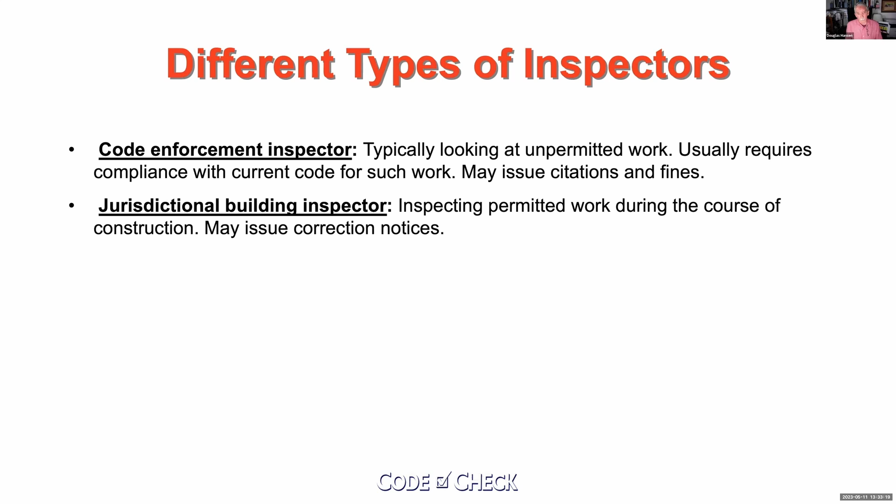Whereas a building inspector is somebody who actually is responding to the fact that there is a building permit and is out there to make their inspections during the course of construction. And then there's a home inspector.

A home inspector has really got a broader net in a way, because you can use a lot of the same data points as a jurisdictional building inspector or a code enforcement inspector, but actually much, much more, because you're there to provide your client with a much wider range of information based on your own experience and training.

So the way construction projects are supposed to work, and once in a while they do work this way, is that somebody decides they want to build something, build a house, say. They apply for a permit, they submit plans, it goes through plan review, they issue the permit, you have inspections, the project is completed, and you issue a certificate of occupancy. That's sort of the on-paper assumption that that would be the process.

But then there's real life. And in real life, what happens is you start the project, and then you get turned into code enforcement by an angry neighbor who doesn't like the idea that you're building a second story on your house that's going to block the sunlight from theirs.

And then you lie to the building department about what's new versus what was existing. And then you draw plans on a piece of scratch paper. My favorite plan that I ever received when I was a plans examiner was somebody tried to write one on a blue shop towel.

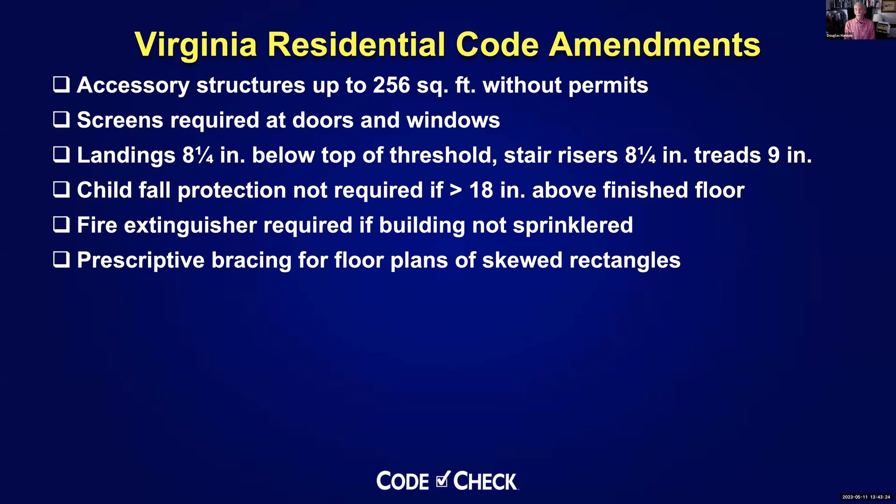This next one is nerdy, no apologies here. The codes have done all the engineering for you in terms of how much bracing you have to have on a building for the wind zone you're in. The model code says this all works if your house can basically be described as several rectangular boxes placed next to each other. But it doesn't work if it's a V-shaped house, or if it's got skewed rectangles, except in Virginia, where they've done the engineering for you and tell you how to do it, which is pretty remarkable. They really paid very close attention to that.

Another strange Virginia requirement, something that common sense would tell you need, is the drip edge on asphalt shingle roofs, except in Virginia.

Virginia uses the IRC's energy code, which is really pretty extensive, and that's why we should be seeing nothing but LED lighting, that type of thing.

Another nice amendment you have is for any type of solid or fuel burning appliance. When that appliance is replaced, it requires that the chimney or vent be inspected, and if it's not inspected by the city, the contractor who does it has to certify that he has inspected it and determined that the vent or chimney is safe. So that's even for replacing a water heater in the state of Virginia.

And one last one is that fire protection of floors isn't required.

So how do we know all this about the Virginia codes? Oops, I should have made a QR code here. Basically, if you search for Virginia residential code, it will take you to the International Code Council's website, iccsafe.org, where you can look for free at the entire Virginia residential code. If you want to copy it, print it, or make notes on it, you have to have what they call premium access, which is very expensive.

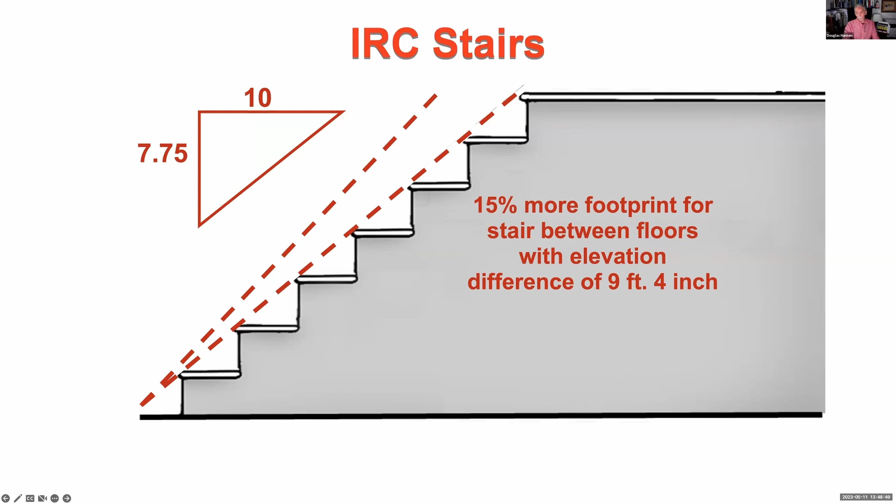Another Virginia change is that they don't require drip edge flashings for asphalt shingle roofs. When I was a home inspector back in the 1980s, I used to see routinely that the last piece of sheathing at the eaves was damaged because of water that sat there, especially with more than one layer of roofing, or water that accumulated from wet leaves in the rain gutter. I would write it up and say, hey, this roof should have a drip edge here, and you've got this damaged sheathing as a result.

And we would get a lot of pushback on it. People would say, oh no, if you just keep the paint on the last piece, you don't need this drip edge, blah blah blah. Well, finally they put it in the codes about 20 years ago, and I was really happy to see that.

And unfortunately, it was in someone's interest to remove that from the Virginia code. So I mentioned earlier, you guys are lucky in a sense that you don't talk about codes per se. I think most of you would agree you'd mention something like this to your client, that here's something likely to lead to rot in their sheathing and need repair, and just say it for that reason, not because it doesn't conform to code.

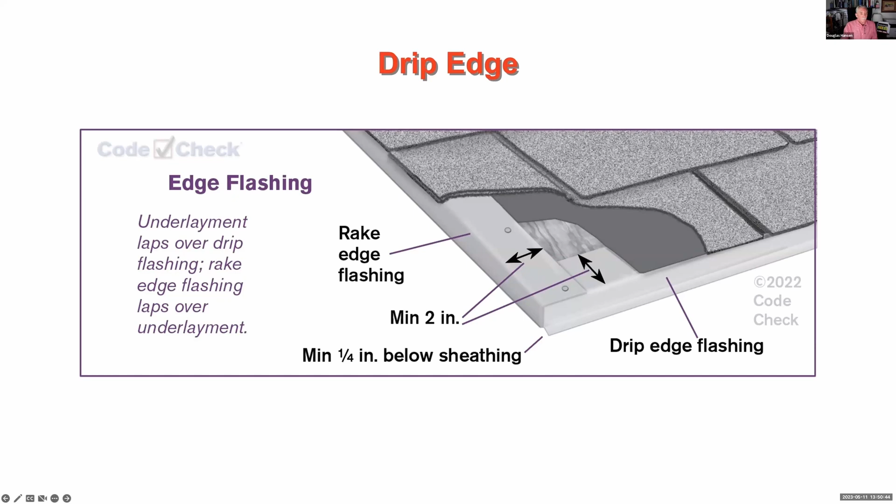About 15 years ago, there were some horrific accidents where a firefighter responded to a building and went in to put out a fire that had originated in a basement or a floor below, and reached these manufactured I-joists, and the floor collapsed with a firefighter standing on top of it. So they lobbied to have this provision added to the codes.

Basically, if you're standing in the basement looking up and you can see manufactured I-joists rather than trusses, it would really behoove you to recommend to your client that they protect those with gypsum board or something similar. It is a requirement in the model codes, but Virginia did not adopt this section, which is kind of strange.

Now Skip, how flammable are these I-joists, this type of processed lumber here?

If you look at legacy construction with dimensional lumber, burn time to structural failure on that floor assembly, if that was 2x10s or 2x12s, would historically be in the 10 to 20 minute range.

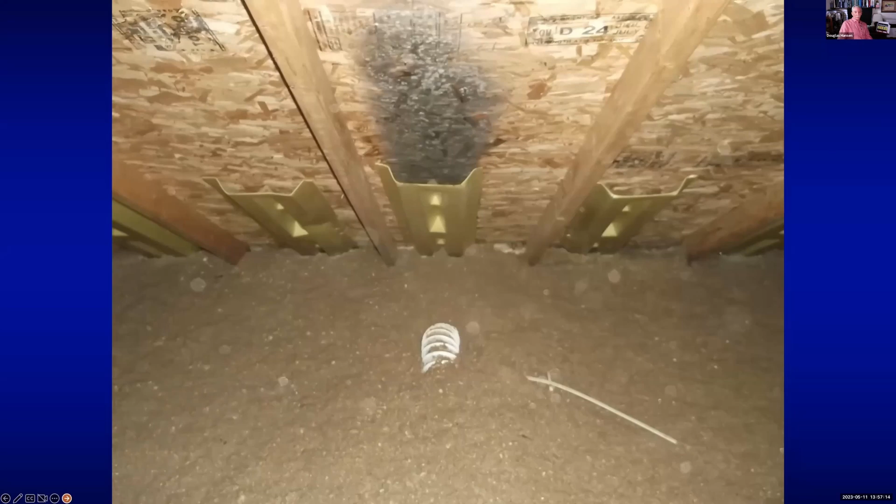Another example of how Virginia does this—and this gets a little tricky to read sometimes—there's a basic rule that says if you've got a 2-family dwelling with a forced air heating system, you don't want to take the return air from one of those dwellings and push it into the other. Maybe somebody on one side smokes and the other side doesn't—this wouldn't be very polite. So that's a standard thing that's been in the codes forever.

And so you'd have to actually look at that other section to see what it is. The other section says if you have an accessory dwelling unit built within your existing house, you don't have to completely update the HVAC system return. So that's a good thing.

There was a small change that took place in the model code starting in the 2015 IRC. That small change was just a few words saying that smoke alarms shall comply with NFPA 72. Some things might be small but have a lot of impact—you know, hand grenades are small. So this particular rule is something that...

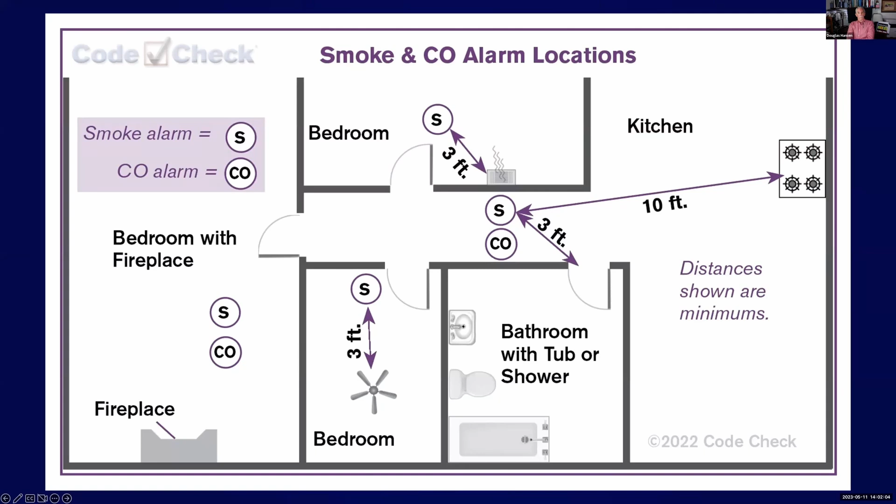So if you go to the next slide now, we've got a whole list of things. The 10-foot rule: if a smoke alarm is within 10 to 20 feet of the cooking appliance, it can be an ionization alarm as long as it has a hush button. It's still going to nuisance trip because that's just what they do.

The photoelectric is also allowed. Anything over 20 feet can be either one, although I can tell you from personal experience, the ionization alarms we used to have in our house were way further than 20 feet away from our kitchen, and anytime we did any kind of broiling, that alarm would go off in a heartbeat.

There's also in NFPA 72 some rules about putting smoke alarms on ceilings or walls that get hot. So if you've got an uninsulated attic, like in an older home, and it has the potential to get very warm, then you're actually not supposed to put the smoke alarms on the ceiling.

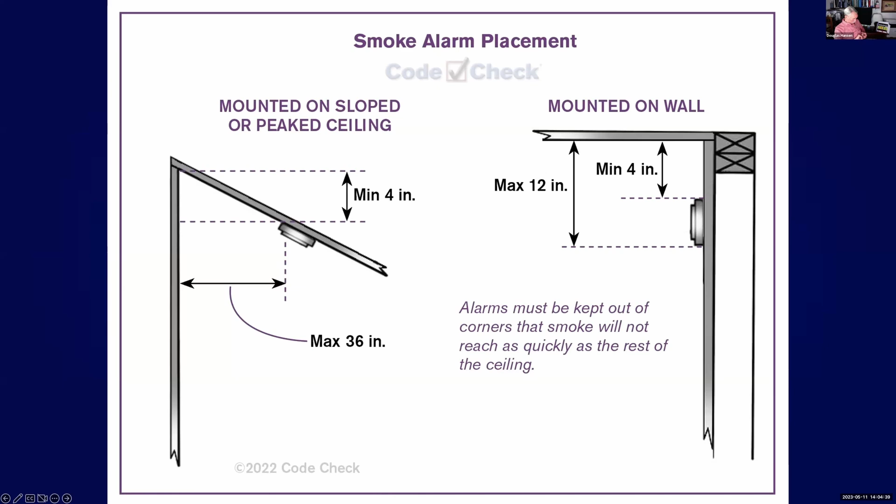Good, good. All right.

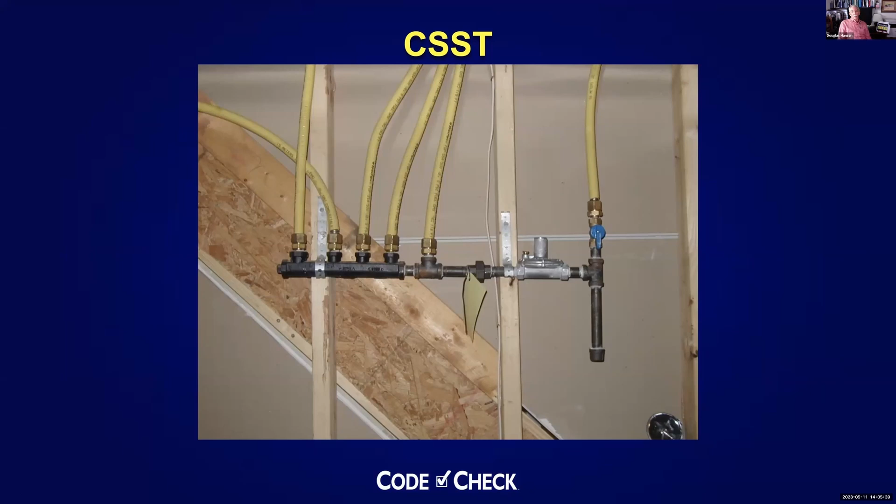But we have since then heard a lot of stuff about CSST. So in general, what I think home inspectors say, and I know certainly what some of the state laws say, is that home inspectors are required to report as a defect any yellow CSST that is not properly bonded.

Well, Skip, has anybody ever made a CSST that was a different color that did not have an arc resistant jacket? Yeah, I've actually got pictures of some black CSST that does not appear to have any arc resistance. When they said yellow, my first thought was somebody's going to figure out that if they just make the jacket black, they can skirt the rule. And sure enough, they did. I got a picture from Colorado and another one from Central California, and neither one of them, they look like some kind of bootleg nonsense.

So yeah, typical. Now, when CSST first came along, it was only available from plumbing supply houses. You couldn't just go into the big box store and buy it. Part of the ANSI, American National Standards Institute, standard for CSST says that whoever installs it has to have completed a training program and be qualified to do so.

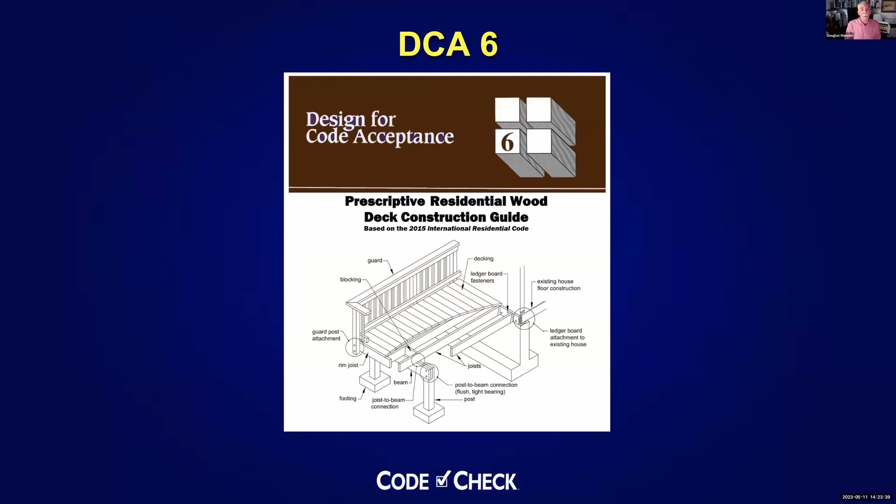There used to be, when we look at a deck, this was the best reference guide we could find: Design for Code Acceptance, DCA 6, from the American Wood Council. They're not going to keep this up anymore, because what's in the code itself now is far more comprehensive, so DCA 6 is kind of a vestigial document at this stage.

And there's also this excellent book written by Glenn Mathewson, that covers everything you need to know about decks and much more. So this book—if you don't own any code books yourself, this is still the one book you should own.

Wait, Skip, did I say that? Didn't I say code check first? Anyway, we'll talk about that later.

What happens with this book is he talks about, for instance, the stairs that lead to the deck. He talks about guardrails, the basic issues of egress and clearances from different things, and a lot of other related things that might come up if somebody decides to put a deck in a particular spot, and he covers them. So this is almost like the life safety things you need to know as a home inspector are in this book on decks for some reason.

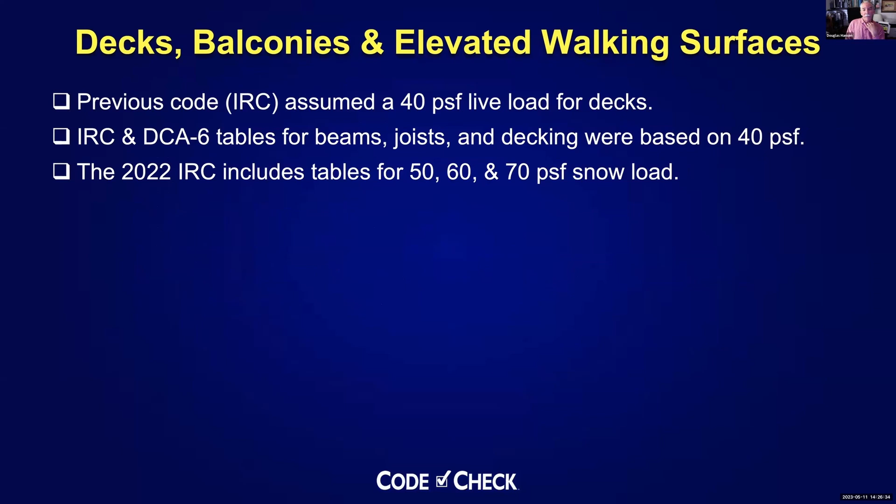A whole lot of things changed in this latest code cycle, the one you guys will be using in 2024, and his book is based on that. They updated all these tables essentially to take into account snow loads and a few other things—now we've got a 50, 60, and 70 pound snow load table for it.

Some things did remain the same—for instance, the ledger connections, which we'll get to. Most deck failures are failures of the ledger.

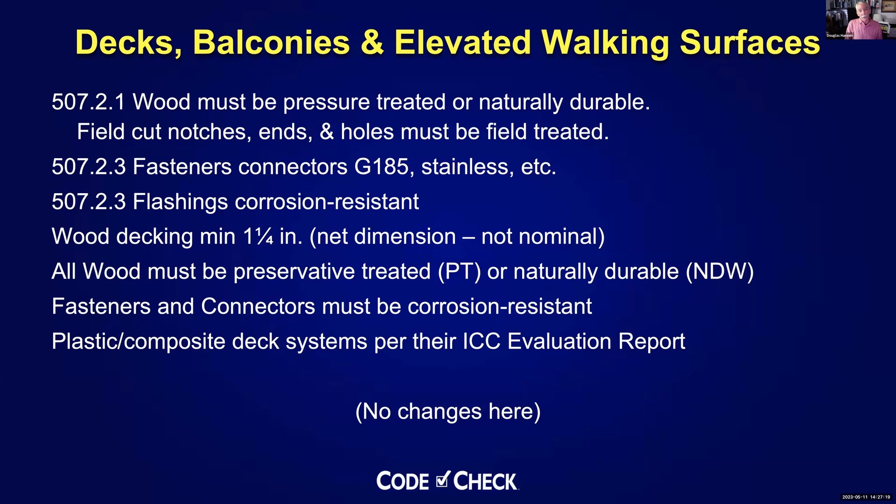Just some overall rules—again, not necessarily changes—your flashings should be corrosion resistant, your fasteners and connectors corrosion resistant, wood pressure treated or naturally durable. So no southern pine decks unless it's pressure treated southern pine. If it's a plastic deck or a manufactured deck railing system, there should be an ICC evaluation report for it.

The previous code had a simple table for post heights. The new code depends on the tributary area. There's a statutory limit that can't ever be more than 14 feet to be within that code—that's not to say you couldn't have a post taller than 14 feet, but you'd have to have it engineered.

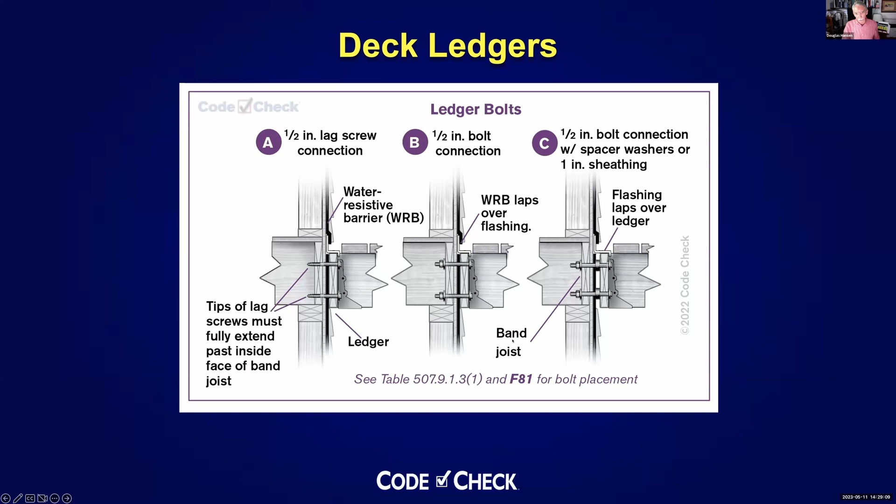Okay, so I guess Ruben talked to you guys today about a lot of good things on decks.

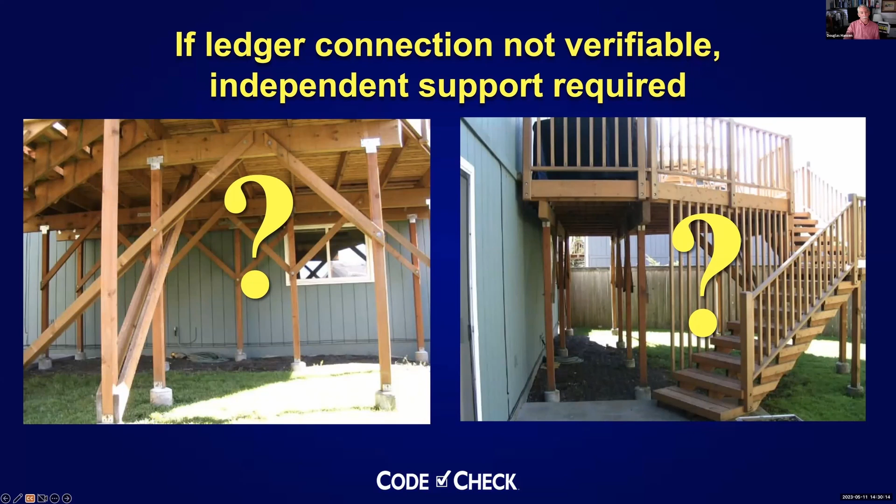Handrails too small or too large. I'm going to skip this.

This is a small change in the code that's coming up: the old code for guards was a 200-pound load in all directions, and now it's 200 pounds applied at the top in an outward or downward direction.

When people talk about this load requirement for a guard, I've seen this repeatedly, home inspectors saying, 'Gee, this looks funny to me, how could it ever be tested to see if it can hold a 200-pound load?' You've got to remember that this 200-pound load is not a deflection limit. It is 200 pounds to failure. In other words, is it going to break if somebody 200 pounds leans against it?

Since it's not a deflection limit, if you look at some of the ICC approved systems, you can push out on that top rail. I've seen ones you could push out as much as 6 inches and it still meets the 200-pound requirement. It just bent, it didn't break.

The other thing that bothers me is we've probably all seen decks with wire as the infill, horizontal wires. It's the same thing there. They might be limiting the space to not more than 4 inches until somebody deflects one of those wires, and then you can push it and have a much larger opening.

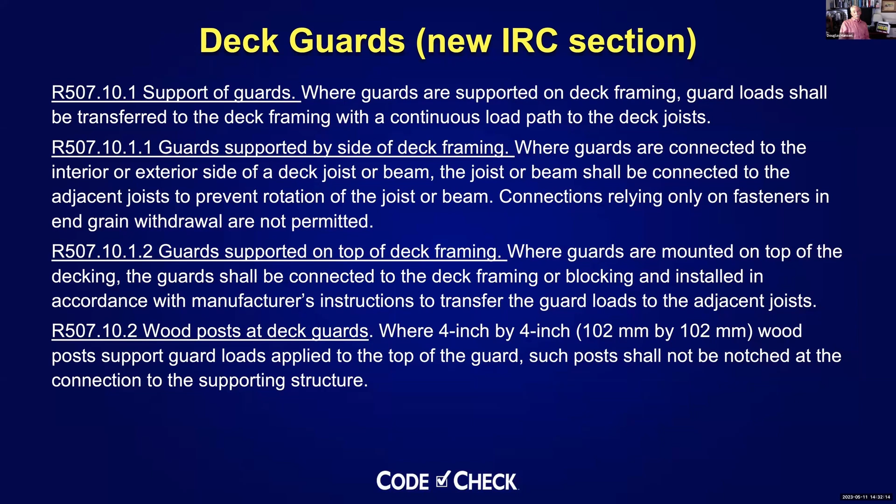So this whole section on guards is new in the 2021 IRC. It's discussed very well in Glenn's book, which covers all these different ways of attaching them and so forth.

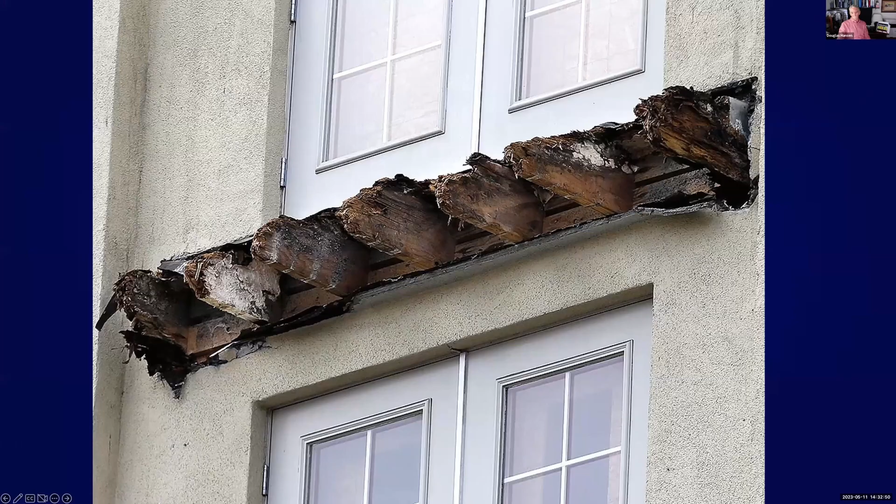I was going to say one other thing on decks real quick before we move on. If you guys don't do anything else, there are 3 points of failure that are most common in decks. Basically 100% of deck failures occur at the ledger, at the guardrails, and at the stair stringer to the deck or landing connection. About 90% of deck failures occur at the ledger, and the other 10% is split between guardrails — all the drunk people out on the deck leaning and taking it over — and the stair stringer connection to the deck, which Ruben got into a little bit today. So if you really hone in on those 3 places and nail them, you're going to eliminate almost 100% of deck failures. I can't emphasize that enough.

So to this case here — Skip, let me interrupt for just one second. Skip, you had a problem with your audio a second ago, could you list those 3 again? Okay, alright, sorry, and thanks for letting me know.

So the 3 points of failure on decks: typically 90% of deck failures occur at the ledger connection to the house. So 9 out of 10 deck failures are ledger related, and almost all of those are nailed connections — a disproportionate number of them nailed connections that pulled out. The other 10% of failures occur at the guardrails and the stair stringer connection to the deck. So my point is you can eliminate almost 100% of deck failures if you simply focus on those 3 red flag areas. Really, really super critical.

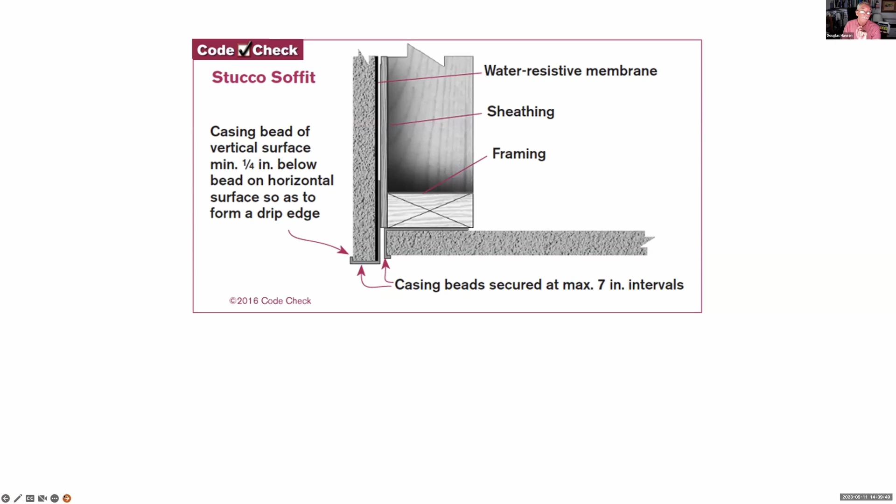Something that I have seen in houses in Virginia is that a lot of times they are not bolted to their foundations, or I've seen houses there with shot pins and things like that. Since this is partly based on codes, I want to emphasize that all walls over foundations are supposed to be bolted to the foundation.

Now, there are some exceptions, but there are also some interesting rules, like the holes for the bolts shouldn't be more than a 1/16 of an inch bigger than the bolt. I know what we used to do in the city where I worked - if they drilled the holes too large, we made them fill the annular space with epoxy afterwards, after they put the bolt in between the bolt and the wood, so it wouldn't slide.

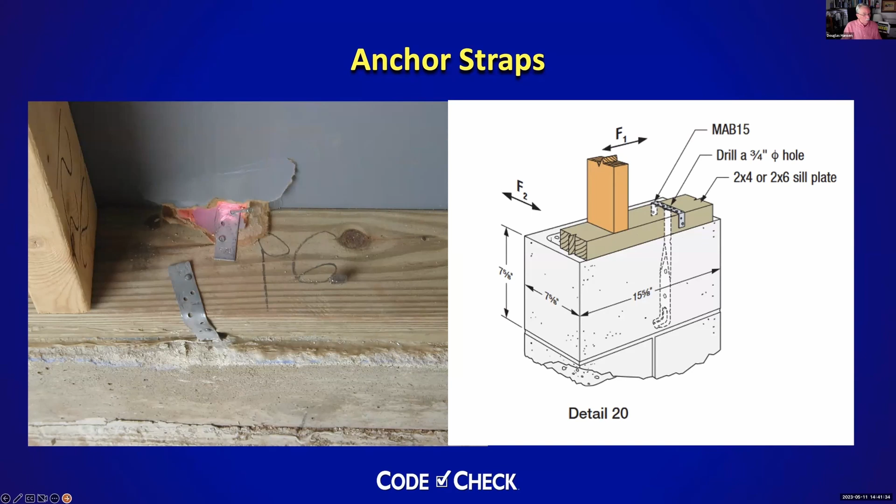There is another thing. This is a picture taken in Virginia here on the left, that I presume was probably this type of an MAB strap here. Instead of being properly installed through a hole drilled in the sill plate, they bent the straps back and tried to wrap them around it. When I took this, there was an entire subdivision of houses built this way.

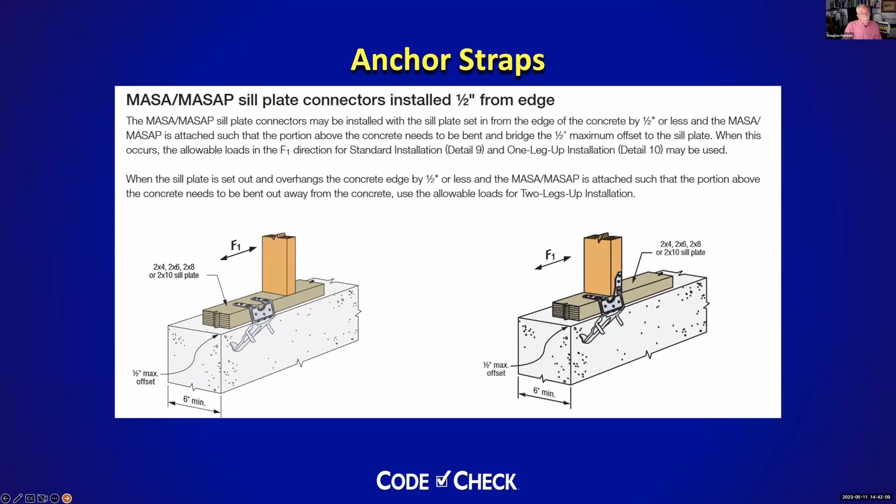One other thing is these straps that are an alternative to bolting are intended to be slightly bent to fit in the field, but they're only allowed to be bent once. A lot of times when people are building houses, they'll bend them just to get them out of the way for working the concrete. And if you bend them back and forth a few times, they just break like anything else.

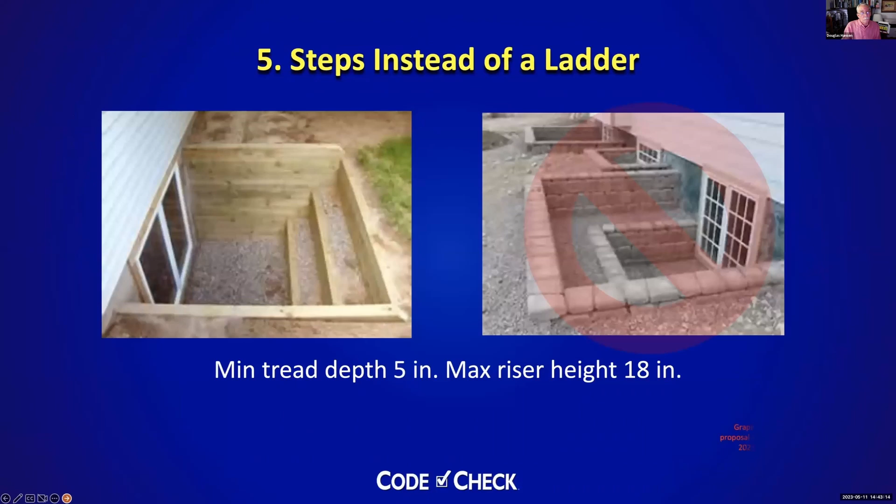I'm going to just leave these other things for us to look at over on the handout. I don't know why that one was there. I think you can just read all this stuff yourself.

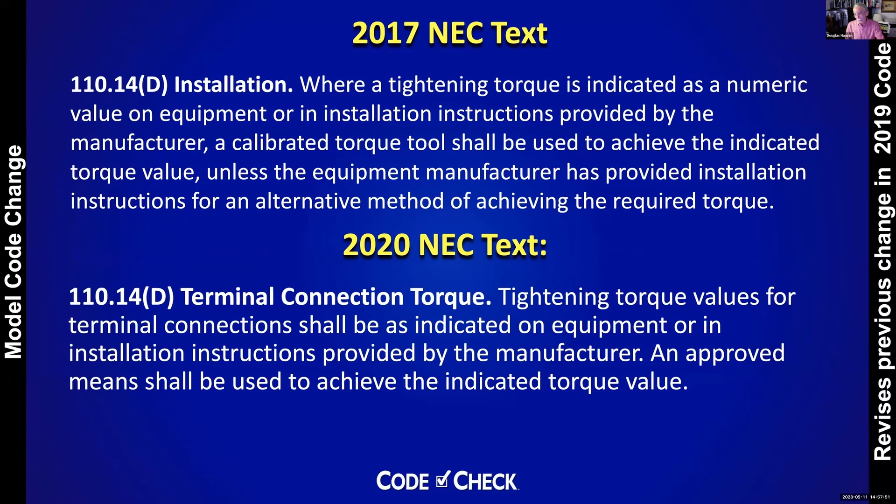So starting with the 2017 NEC, they said let's make sure that everything marked with a tightening torque is actually checked with a calibrated tool for that purpose. I don't know very many jurisdictions that enforce this on residential, but I think it's definitely worth taking a look at. There's a minor change coming up in the 2020 code too, which is that they've given the building department approval to use other means, such as IR testing, to determine if things are properly tightened.

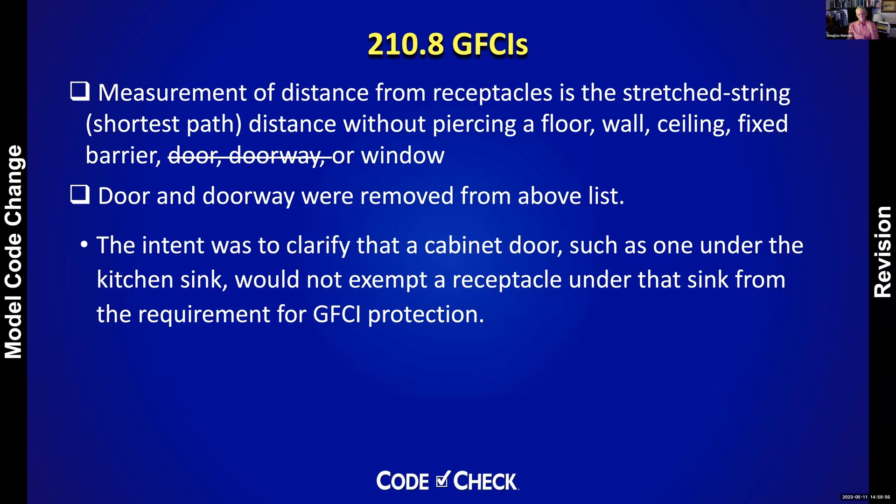So the way that it is now is it says that if you're within 6 feet of the edge of a sink, then you have to have GFCI protection for that receptacle outlet. So here, if I have a receptacle outlet that is in the hallway, it's not even in this bathroom, but I could plug something into it and manage to reach that sink with less than 6 feet of cord, I have to be GFCI protected. So this, I think, was a little inadvertent result of their making this code change, but it's nonetheless a real one.

So the bottom line for us and for you as home inspectors is that question about whether the garbage disposer required GFCI protection is resolved. Another section of the code already was saying that a receptacle for a dishwasher requires GFCI protection. And that also resulted in a rule that said that the receptacle for the dishwasher cannot be behind the dishwasher, that it has to be in the cabinet adjacent to it. Just like with all GFCIs, that the reset device has to be accessible, but it really kind of closed a loophole that used to allow the idea of the receptacle behind the dishwasher, where you couldn't really reach it unless you pulled the dishwasher out.

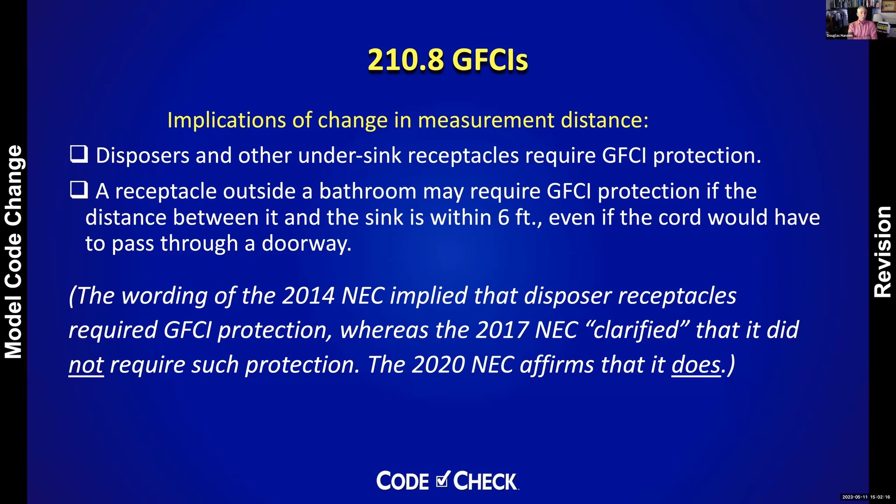This is not where it's going to end in terms of the expansion of requirements for GFCIs. In the 2023 code, which it'll be still some 4 or 5 years before you guys adopt that, what happens is that every receptacle in a kitchen, regardless of how near a sink or whether it's serving the countertop or whether it's serving the refrigerator, if it's in a kitchen, it's going to require GFCI protection.

There's another big change in this that took place in the, I guess this is in the next code cycle for you guys, is that all of the lists of locations that we think of that require GFCIs, we've always thought of this in terms of the 120 volt appliances. And a big change now is that it also applies to the 240 volt appliances. So that is to say anything that is 150 volts or less to ground. And a 240 volt appliance, if you measure between either of the hot conductors and ground, you're at 120 volts. So that means that they require it.

So we've got a requirement already that we have GFCIs for laundry rooms. Well, we have an electric clothes dryer in that laundry room. That means that under this new code, it's going to require GFCI protection. And the only way to really do that is going to be through a circuit breaker that provides that GFCI protection.

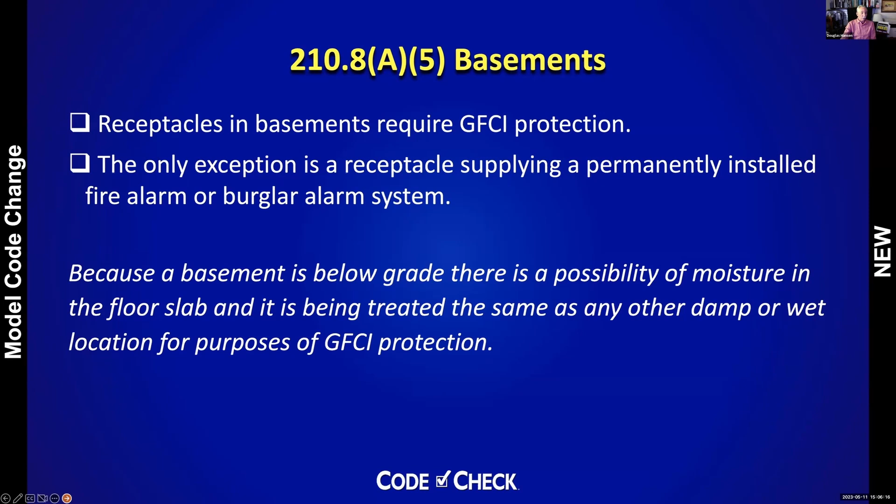A change in the 2020 NEC is that all receptacles in basements require GFCI protection. That could be even in a finished basement that's got bedrooms down there, or a media room, anything else like that. And that's because as long as it's below grade, there's a possibility of moisture in the floor slab, so it's treated the same way as any other potentially wet or damp location.

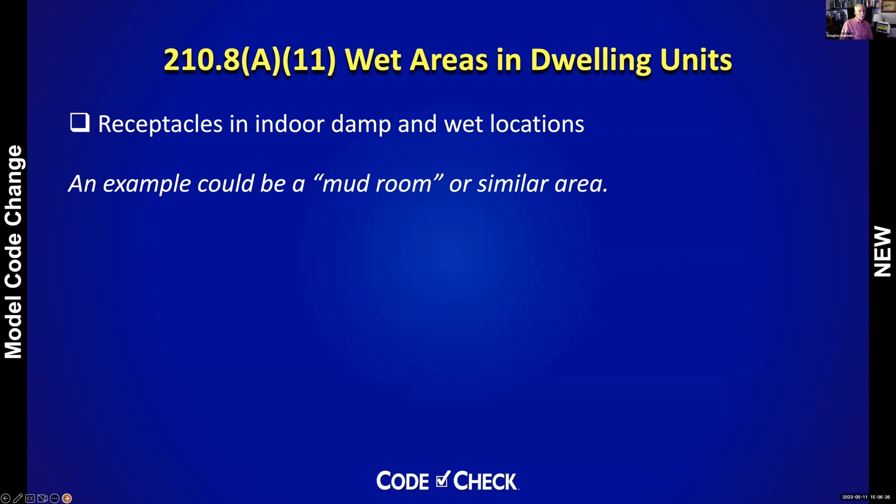Another thing they added was this catch-all of wet areas in dwelling units. This could be something that doesn't even have plumbing fixtures in it. It could be something that's just a mud room, or where the dog comes in and shakes himself off when you come back from your walk.

Now, we know that when a furnace is in an attic space, or if it's in a crawl space or even a basement, any place, it requires a receptacle to serve that piece of equipment, and that receptacle has to be on the same level and within 25 feet. It now also has to be GFCI protected. That's an additional requirement for it.

That reminds me, there was a question during the break about what are the heating requirements for bathrooms. As far as I know, there aren't any in the codes. What happens is that there's a requirement that you provide heat to habitable rooms, but a bathroom isn't considered a habitable room. So I imagine that a lot of builders choose to have heating outlets of some sort in bathrooms, but they're not actually required by code.

Next, this is an interesting change where it talks about outdoor outlets for dwellings. We got to remember the electrical code's definition of an outlet: it means the point on the branch circuit at which power is taken to the utilization equipment. So it doesn't necessarily mean receptacle outlets. In the case of an air conditioning unit, the disconnecting means is the outlet of the circuit, and then the whip to the air conditioner is part of the air conditioner, basically.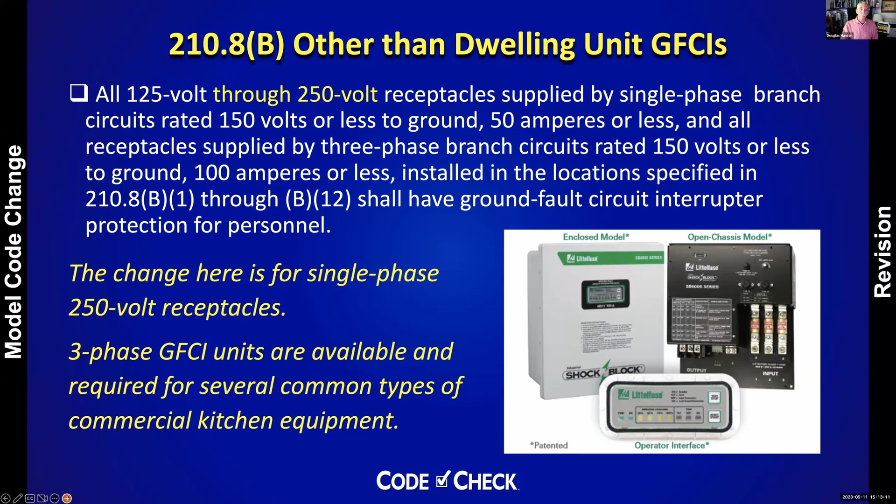So you have to add one of these, made by Littelfuse, called a Shock Block. It costs about $600. You add those to your dishwasher circuit and plug your dishwasher into it. This is important because a lot of people get shocked or electrocuted in restaurants. Basically everything in a restaurant kitchen has to be GFCI protected, including major machinery, like the thing for kneading dough for pizza or bread, or a big mixer, whatever it is, it needs to be GFCI protected.

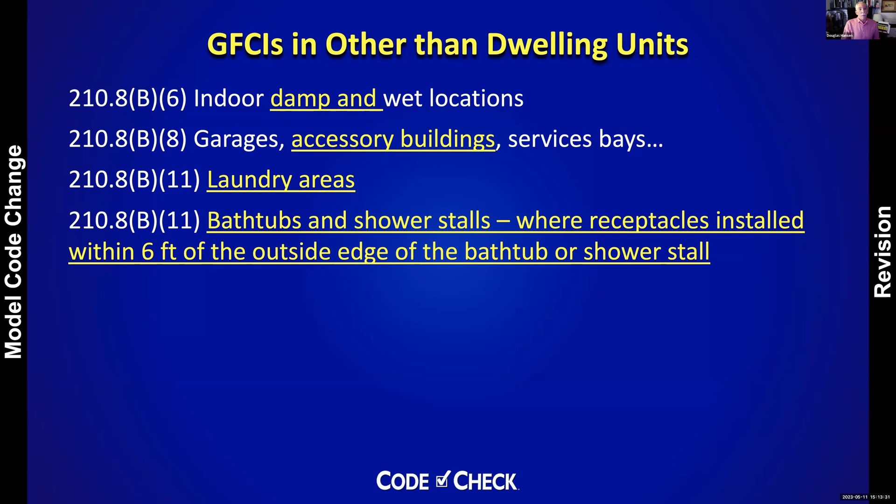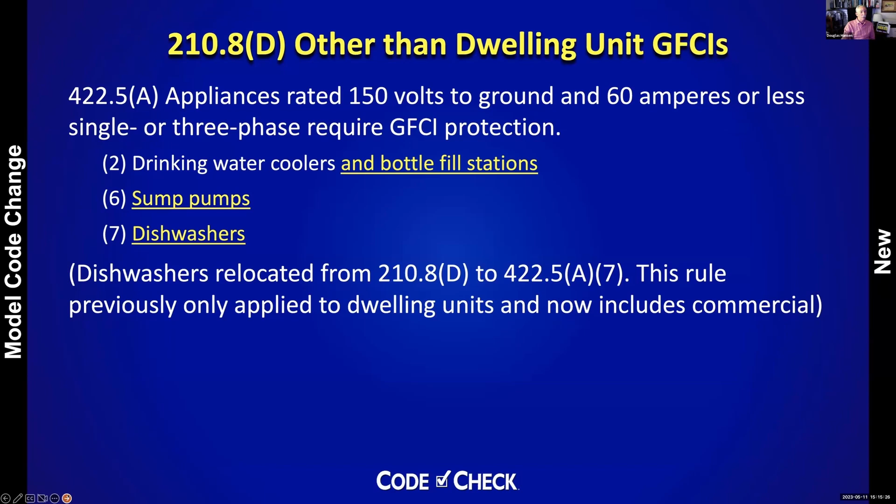Okay, so this would all be in your handout, you could go through and look at it. So, excuse me, my voice is giving out on me here.

Okay, in the 2023 code, we're going to see specific statutory requirements for all of these appliances to be GFCI protected. All this is great, except for those occasions when we get back to the question of nuisance tripping. What I'm finding from my electrician friends is that a lot of times something like a microwave oven that's already required to be AFCI protected, if we also put it on something that's GFCI protected, every time we use the microwave the breaker trips, that kind of thing.

I imagine you guys are probably hearing similar stories like this. Sometimes I hear it attributed to one particular manufacturer more than others, but I think this is going to be an interesting conundrum as this all moves forward.

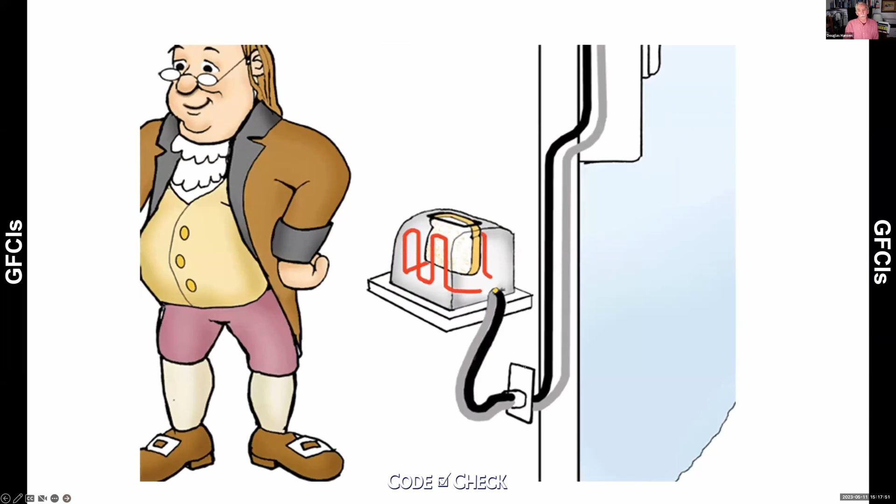So here we see Ben Franklin, oh, he's got a fault on his toaster. There it is, don't touch it. Oh, there he goes.

So this gets back to that question of why the 2023 code says everything in a kitchen gets GFCI protection, because that receptacle outlet could be more than 6 feet away from the sink, but the toaster itself could be less than 6 feet. So they said, look, we should be looking at the appliance, not the outlet. It's the appliance itself, if it's got a fault, and toasters are a good example, that should be protected. So I like this for explaining the 2023 code.

This is a good one. There's a new rule coming up on bathroom branch circuits.

And this is interesting. Starting with the 1996 electrical code, we required a 20 amp circuit for the bathroom receptacle outlets. Previous to that, the only times a 20 amp circuit was required were for laundry circuits and for the small appliance circuits in the kitchen. And then they started requiring them for the bathroom receptacle outlets.

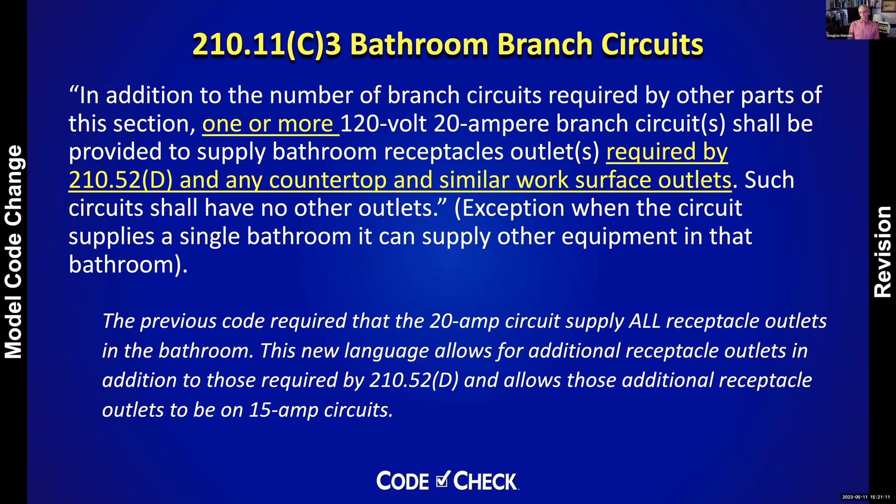Another thing that changed in the 2020 code that you guys will get next year is this zone above a shower or a bathtub. Previously, our code has told us that we can't have any light switches inside our shower unless it's part of one of those manufactured showers with a touch screen that does a steam shower and full body massage or whatever.

And that we also couldn't have any receptacle outlets directly over the footprint of a shower or tub. There's also been, for a long time, a prohibition on having track lights, pendant lights, or ceiling paddle fans directly above a shower or tub, unless it was at least 8 feet above it, or outside the zone within 3 feet of the outside edge of it, because stepping into that tub, you could reach the chandelier or paddle fan. So this was a requirement for where you could have those kinds of lights or appliances, not in this zone.

Well, now they're also saying no receptacles in that zone. So the receptacle used to be okay on this wall as long as it was outside the direct footprint of the tub or shower, but not any longer. It's got to be at least 3 feet away from it.

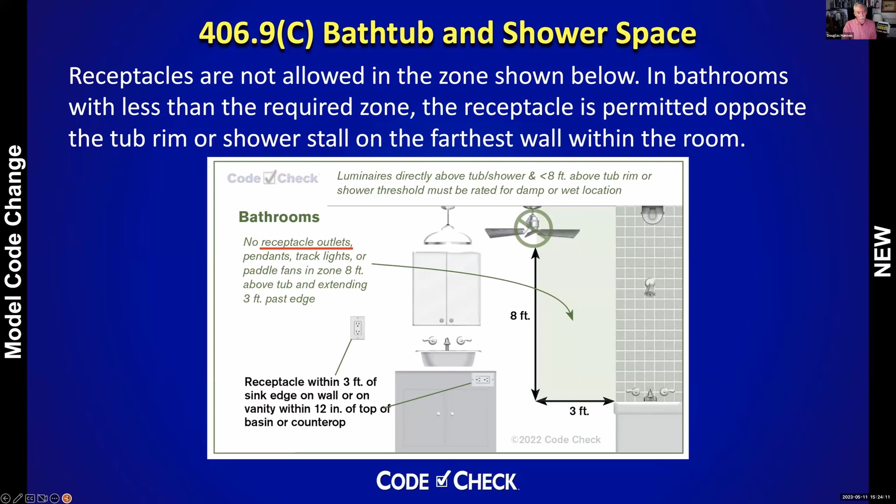So I'm not happy with this particular code change, and I know that it's had some work done to it, and it's going to have some more now that Ryan Jackson's on the code panel for this one.

Garage branch circuits. This is an interesting one. You've got a fourth place now that requires 20 amp circuits, which was clothes laundry rooms, kitchen small appliance circuits, bathroom receptacle outlets, and now garages. And that's because they finally recognized that a garage turns into a man cave. I've been told people sometimes park cars in them, but I couldn't imagine that myself.

Our garage is half my wife's studio, the other half my man cave. They require this 20 amp circuit for the garages. In the next code cycle, they get pickier: receptacle outlets served by that circuit have to be no more than 5.5 feet above the floor. So the garage door opener outlet has to be more than 5.5 feet above the floor. Instead, you need one for each vehicle bay. These other receptacles for the vehicle doors and for the lighting outlets cannot be on the same circuit. You have to have a dedicated 20 amp circuit for your garage receptacle outlets.

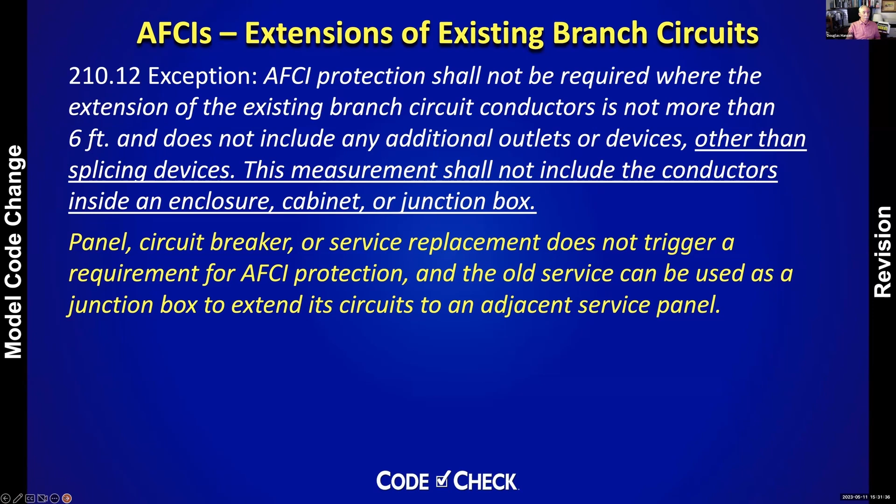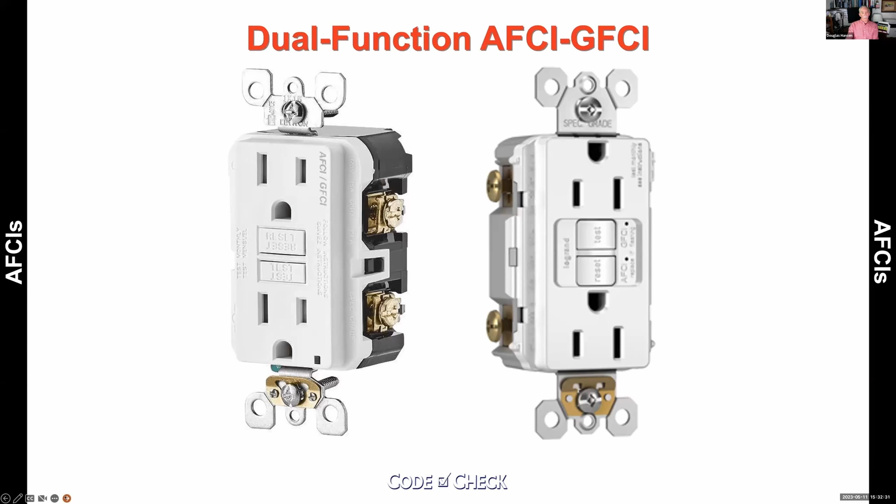Now, we call these dual function rather than combination because the word combination got appropriated to a particular type of AFCI, which distinguishes it from what used to be before that, the branch feeder AFCI. For instance, if you are replacing an ungrounded two-slot receptacle in a living room today, in theory this is what you're supposed to replace it with: this dual function AFCI/GFCI, which would be allowed without an equipment grounding conductor, and that would protect any appliances that you plugged into it.

Basically these days the only panel manufacturers left are Eaton, Siemens, and Square D. General Electric has just gotten out of the business. They all make one like this, which is good because it makes it a lot cleaner inside the panel, not to have all those pigtails.

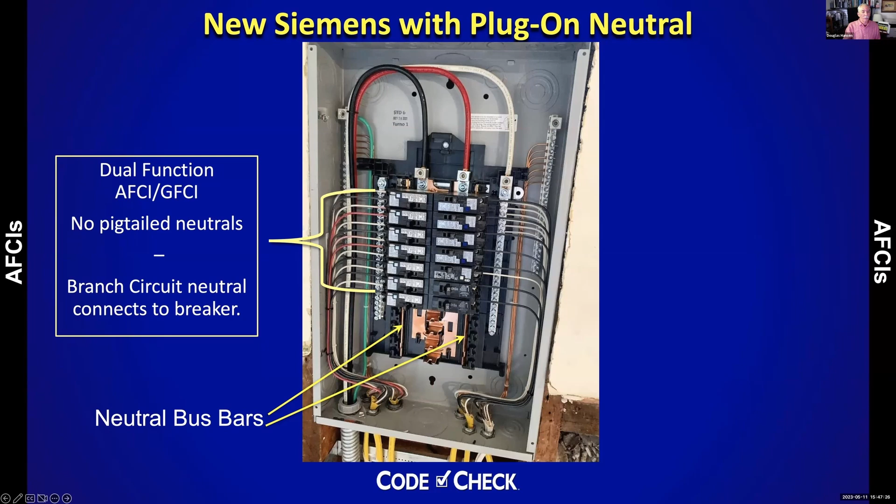Okay, so these are dual function AFCI, GFCI breakers. Now, because these are GFCIs, they're like any other GFCIs you're used to seeing that had a pigtail on them, where you'd see three wires coming out - the neutral going in, the neutral going out, and the hot wire going out. Well, because we don't need the pigtail due to the plug-on neutral, all we see is the neutral and the hot coming out of each breaker. So far that's normal, and these are dual function, both AFCI and GFCI.

Then we look over here on this side, and we have ones that are not GFCIs - all they are is AFCIs, and miraculously they have no neutral wire coming out of the breaker. This is a new technology that Siemens came up with about a year ago. What they did basically was say that the GFCI function built into all our AFCIs is not required by the UL standard, it's not really necessary, so let's not build it in there - let's make an AFCI that doesn't do that.

As a result, you can have an AFCI where that branch circuit connects to this common neutral bus that we see over here - those white wires are the same white wires for those circuits. So here we've got four AFCIs where we only see one wire coming out of them, just the hot wire. Now, they do require that they be sitting on that plug-on neutral for this to work. It's a very new technology, and Siemens was the first to arrive at it.

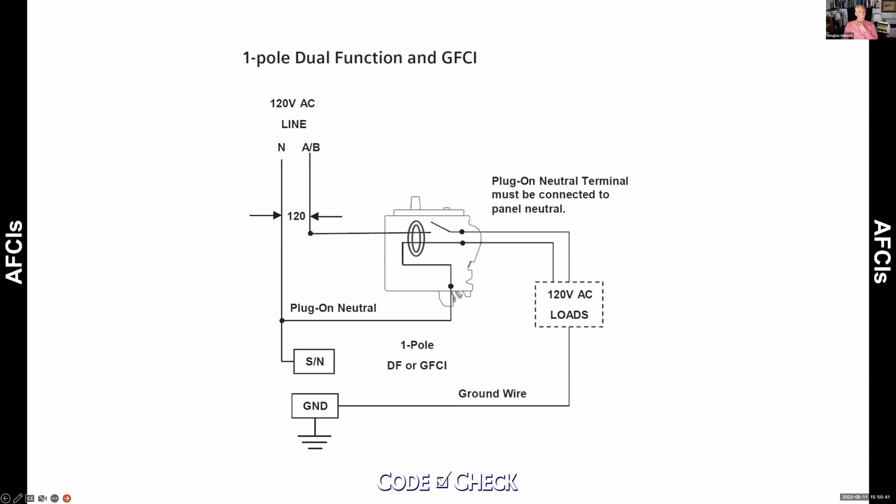Now we look at one that's the dual function AFCI, GFCI. Now we look at the one that's just an AFCI, and we see that it's got the plug-on neutral because it needs that reference to be able to have the AFCI sensing technology work.

But coming out of it, we only have a hot wire, and we can take the neutral down here from this common bus. So this cleans up the inside of our panels even more and makes it easier to wire, since we can just connect up all our neutrals on these things in advance before we've put the breakers in.

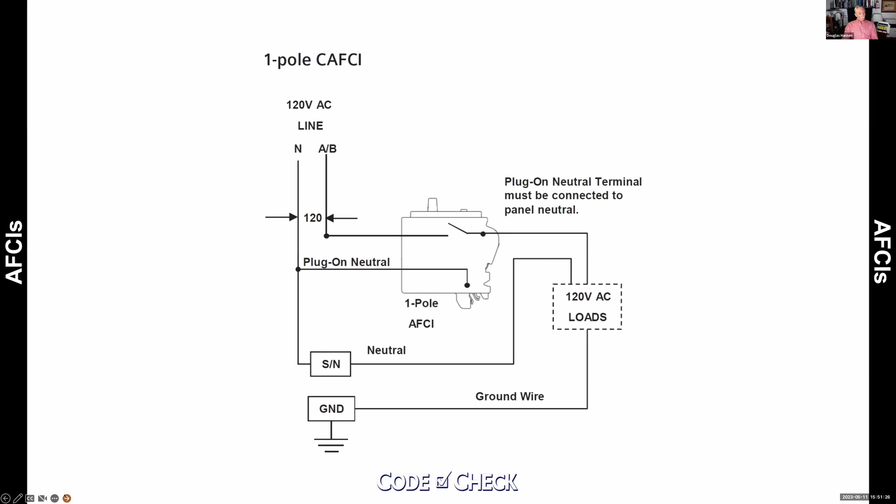Notice that we have red and black wires going to these breakers. What does it usually mean when we have a red, black, and a white in a cable? It means that we have a multi-wire branch circuit, right? And if it's a multi-wire branch circuit, it requires a common handle tie, doesn't it? So that if we trip open one part of the multi-wire branch circuit, we also trip open the other part of it, right?

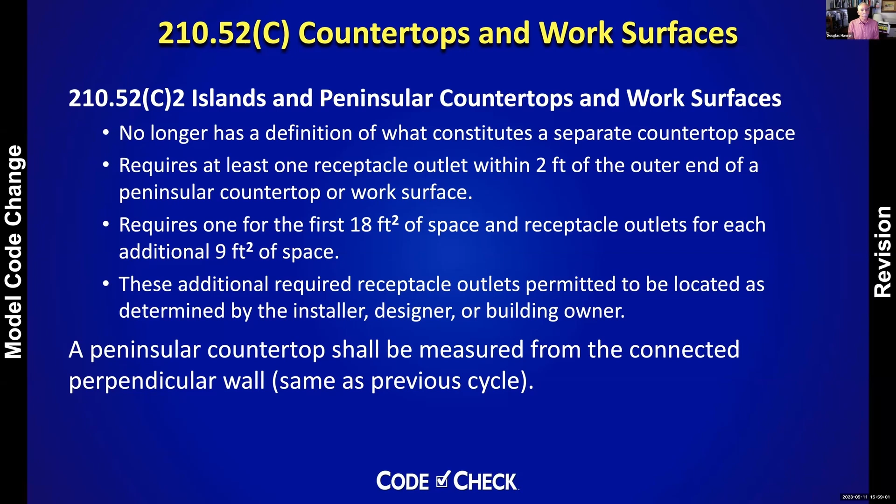I think this is a lot to absorb, so let's look at a picture of what they're talking about. This is the upcoming code. This island here is 7 feet by 4 feet, so that's 28 square feet. I need one for my first 18 square feet, and one for my next 9 square feet—that gets me up to 27. I've got an extra square foot there, so I have to have a third receptacle outlet. So I'm going to have 3 receptacle outlets for that countertop.

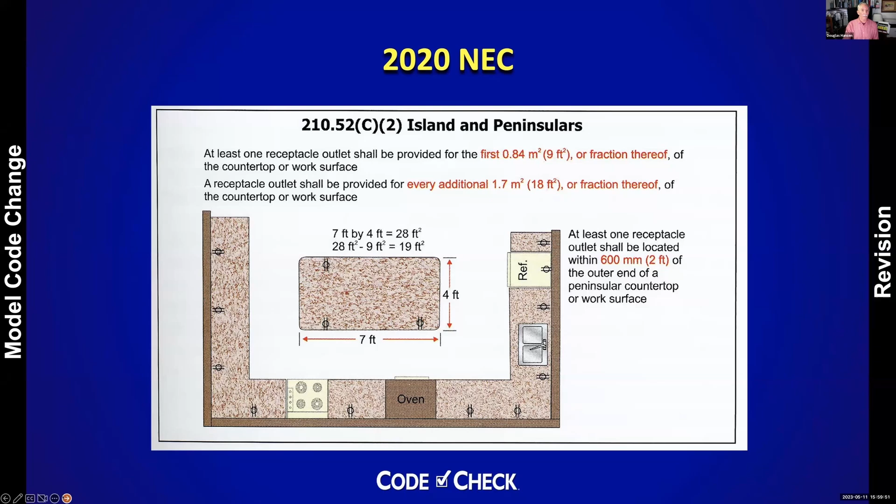That's quite a lot of receptacle outlets. Also, if this is a peninsula, we know we're going to need one within 2 feet of the end of it. But the way we measure that peninsula is starting from here—everything in red is part of the dimension. In this case, we've got one that's 16 feet, so we only need one receptacle outlet for it. In the 2017 code, it could be the one on the wall. In the 2020 code, you'd also have to have one within 2 feet of the end of it.

So far making some sense? Okay, and of course they say perpendicular wall—I don't think that little peninsula is perpendicular to anything, it looks pretty much at a 45-degree angle. What do we call it? I'd still treat it the same way, but it's interesting how they've done this. Notice also that this receptacle on the end is not supposed to be more than 12 inches below the countertop if it's considered to be serving the countertop, and if there's an overhang, it can't be more than 6 inches over the top of it.

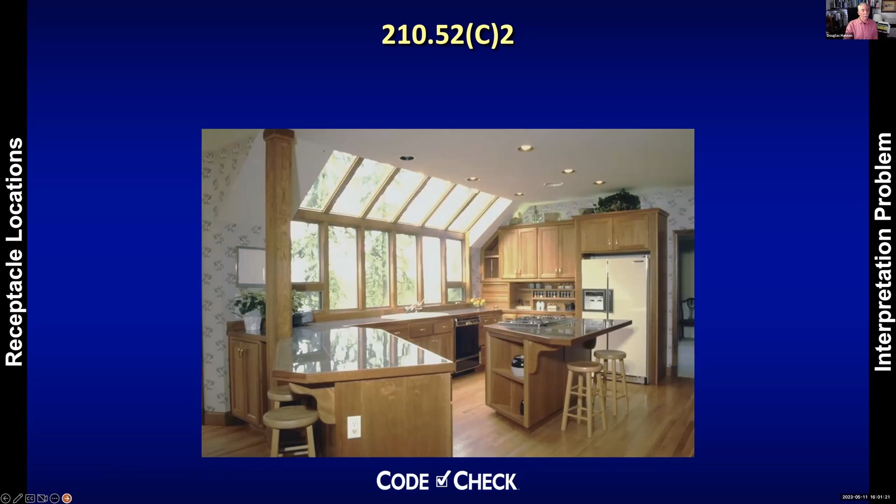The other big change is—well, first let's look at what's not a change. What's not a change is you could have an outlet above the countertop, like if a set of kitchen cabinets came down above it, and you could put receptacle outlets in the underside of those upper cabinets, as long as they weren't more than 20 inches above the countertop. Or you could have those pop-up receptacles that sit in the countertop itself, which you press and they pop up so you can plug something in.

Those aren't changes, but the big new change is that it can be below the countertop for anything, whether it's an island or just your regular countertop, with a maximum of 12 inches below and a maximum overhang of 6 inches. So this detail—not more than 12 inches below, not more than 6 inches of overhang—you could do that not just for islands or peninsulas, but for anything in your countertops.

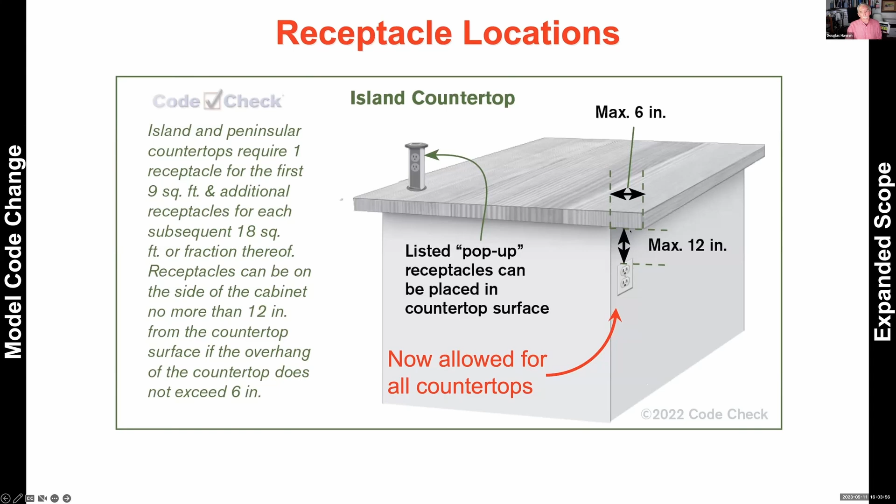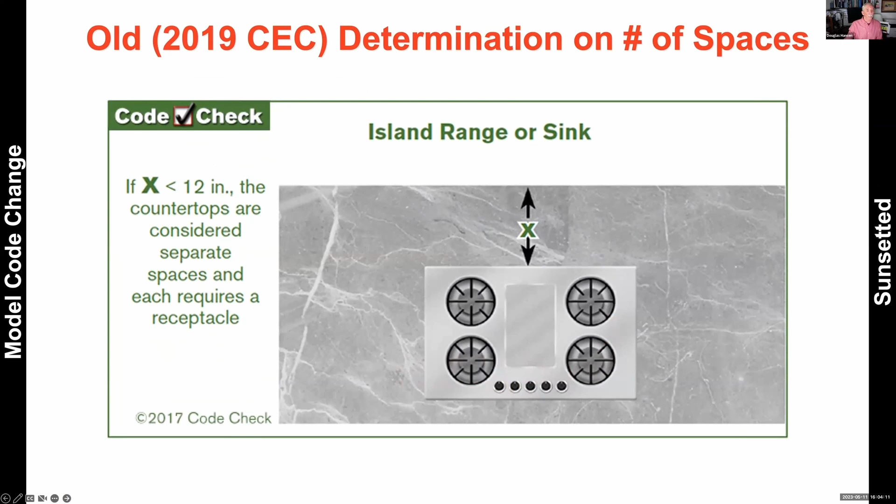It used to be that these were separate, that if there was another space off to the right, that would be a separate space if it was less than 12 inches.

So what's going to happen next? Once you get to the 2023 code, everything I just told you goes away. You're no longer required to have any receptacle outlets at all at an island or a peninsula. And if there aren't any, you do have to put in the infrastructure for them. You could run an empty conduit to the island, or run a cable underneath and have it terminate in a box that's got a cover on it.

So no requirement for island and peninsula receptacles. And this whole thing where I just told you that this next code cycle says you can have them below the countertop surface anywhere - well, they're not exactly prohibited. They're not required, okay.

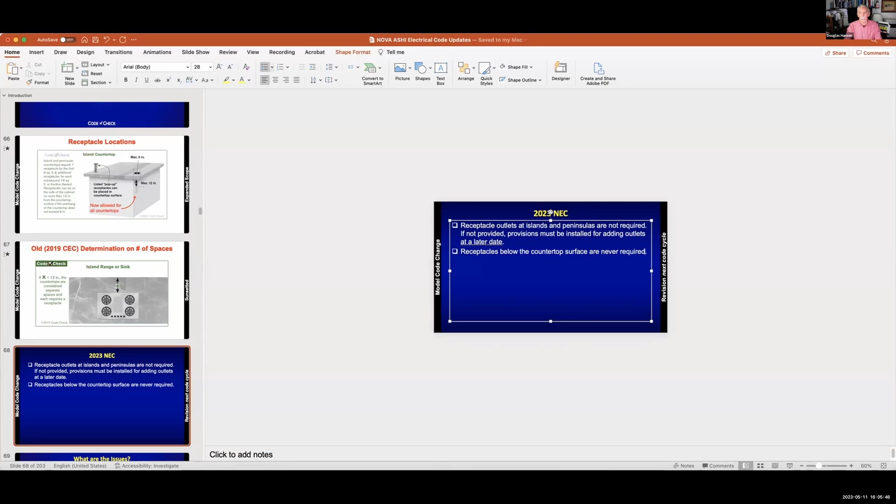The reason why I have to say they're not required rather than prohibited is that the section this all comes from in the electrical code, 210.52(C), is titled 'Required Receptacle Outlets.' It doesn't say where receptacle outlets are prohibited.

Now, I have a personal pet peeve, and I put in for a code change on this several times. I'm going to do it again for the 2026 code. I'm sure some of you have seen this, where you've got your range with countertop spaces on each side, up against a wall, and somebody puts a receptacle outlet on the wall right behind the range. So the only way you can ever reach the plug for that, to plug something in, it has to go across a burner on the stove. I think that's a pretty silly place to put receptacle outlets, and I keep trying to get it outlawed.

But the problem is that this section of the code talks about where they're required, not where they're prohibited. So I'm going to have to go to a whole different code-making panel to try to get that prohibited. It's going to be something in Article 406, not Article 210. Anyway, so I've been tilting at that windmill for about 15 years.

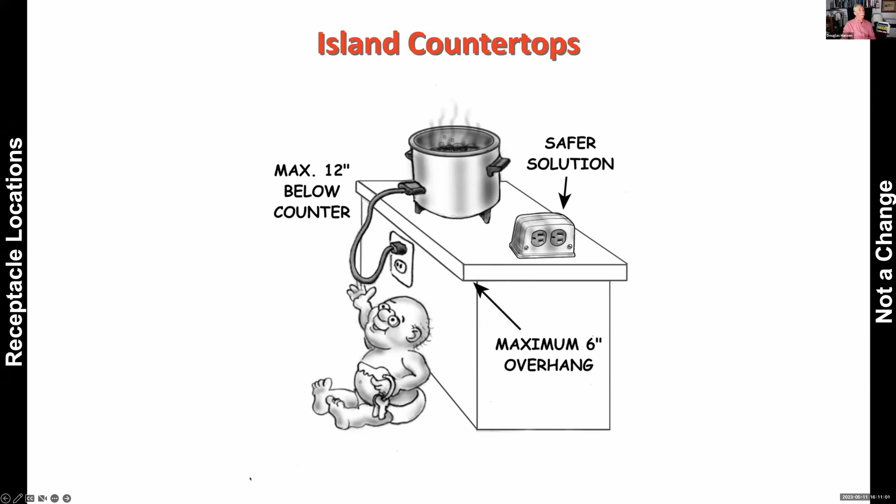I remember once, about 25 years ago, I was teaching a class, and there was a guy in the class with this really interesting birthmark on one side of his face. When I got to this slide, he told us the story, and it wasn't a birthmark. It was a frying pan full of bacon grease. He was a little kid, he pulled it onto his face, and he's had a scar there forever.

There is also, and this would be a good reason for you to download the PDF for this, an excellent video on this on YouTube on Ryan Jackson's channel.

There are two people that I think you really should be looking at for code education online. One is Glenn Mathewson with buildingcodecollege.com, and the other, for electrical, is Ryan Jackson. If you just go on YouTube and search for Ryan Jackson Electrical, you'll come up with dozens of videos that he's made that are really, really good.

If you look at this particular one, you'll see him discussing in more detail the whole story of how the electrical code got to this place of going, wait a minute, we don't want these receptacle outlets down low. It's an excellent video. He also sits on a couple of the code-making panels and is a professional electrical code instructor now. He's really good.

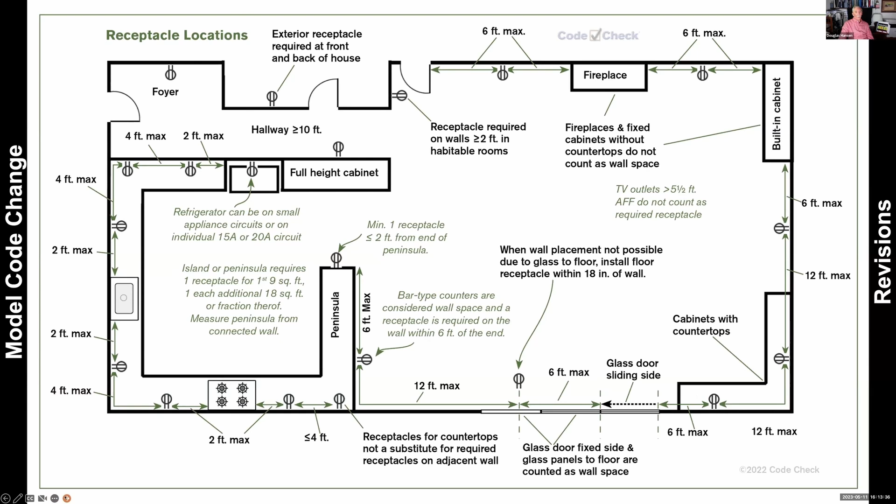This is an illustration from that book that Skip just got 300 copies of.

Of course, no face-up receptacles in countertops or work surfaces. You're supposed to use the listed pop-up receptacles. These cost a couple hundred dollars, but they are tested by UL for water resistance. There are actually two standards for them: one for what they call countertops, and one for work surfaces. The difference between the two is just the amount of water they test them with. But you press that thing back down and it makes a watertight seal to that little gasket.

So that's it for receptacles in kitchens. Now we've got a couple of big topics still ahead of us. We also have a lightweight one here.

Douglas, before you move on from electrical, you were talking about the face-up receptacles. How about wall receptacles in floors and mantles, fireplace mantles?

Oh, okay, yeah. In a floor, it's not the receptacle that has to be listed for the floor, it's the box that holds the receptacle. There are two basic types of them, plastic and brass.

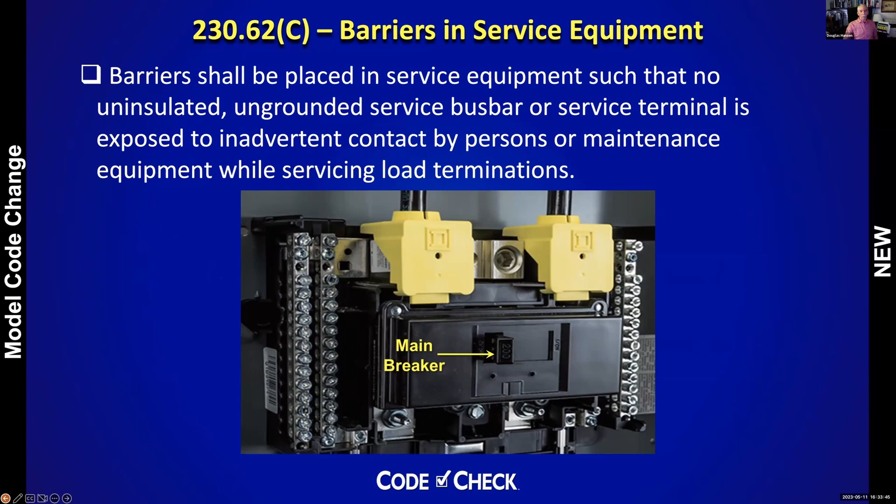And the exception gets to my next rhetorical question: how many disconnects are you allowed at the main service?

Okay, pretty standard question that is probably on every home inspector exam, right? And 6, obviously. 6, okay, thank you. Thank you for participating. Okay, so that used to be the rule.

But what is happening now is going forward from 2020, each service enclosure is only allowed 1 disconnect, period. So this old rule of having up to 6 disconnects in a single enclosure has gone away.

And at this point, nobody could actually even manufacture something like that and get it with a UL listing on it. So the whole idea of first those barriers, and now saying let's no longer have the exception for the 2 to 6 disconnects in there, is basically so that if you did shut off that main breaker before you opened it up, you could not get electrocuted.

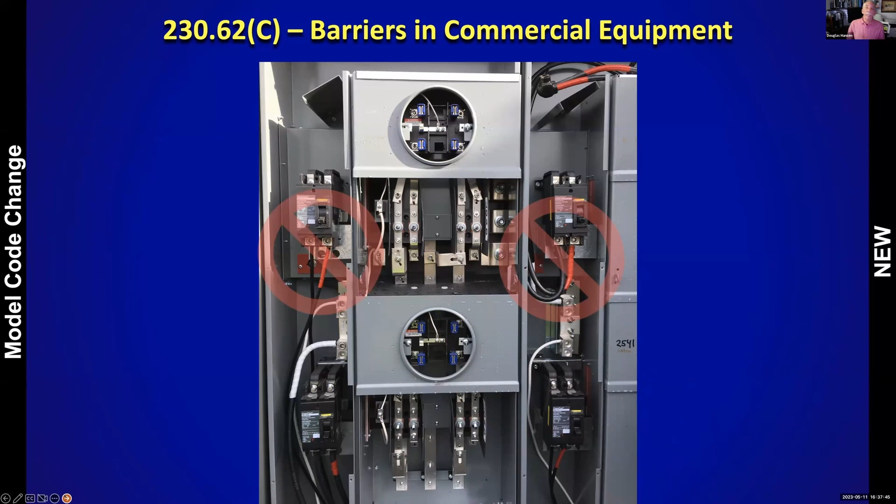So this is a prelude to it, but it also really gets me thinking about what is the purpose of this new rule. The purpose of this rule is — I think that once we look ahead, what are people going to look back on in the 2020s when they're the home inspectors of 2050?

They're going to go, oh, it's one of those old panels where you could put 6 disconnects in it. It's terrible — you could get electrocuted even if you shut off the power on this, because it's still got a live bus bar inside. Can you believe they used to make things like that? That's what they're going to be thinking 20, 30 years from now when they look at the stuff that we now see every day.

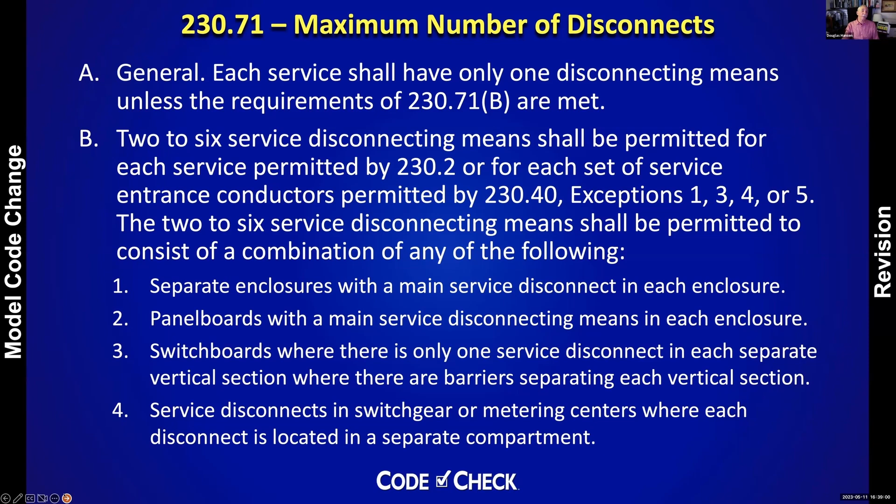So basically, what that other person just said: the 2 to 6 disconnecting means are permitted, but only as long as they're in separate enclosures with a separate service disconnect in each enclosure, and this also applies to commercial. So it's a big deal. I think of all the changes in the upcoming code cycle, this is the biggest one.

But just in case that wasn't enough, there's one more. A lot of times I've seen houses in Virginia where I've seen just the electric meter on the outside, and the first place that the actual service disconnect was located was in the basement or inside of the building.

That's no longer allowed, or not going to be any longer allowed. Instead, there must be an emergency disconnect on the exterior of the building for 1 and 2 family dwellings. Now, that emergency disconnect could consist of the service equipment with a breaker, that's in a type 3R enclosure that can be out there in the snow,

Or it can be a shunt trip, or it could be a meter disconnect, but that's a very unlikely scenario. Meter disconnect really is just another variation of the term for service disconnect.

So the other thing is that emergency disconnect has to be capable of actually working. It has to be rated for being opened under load, rated for the available fault current, and so forth. And it's got to be marked as the emergency disconnect.

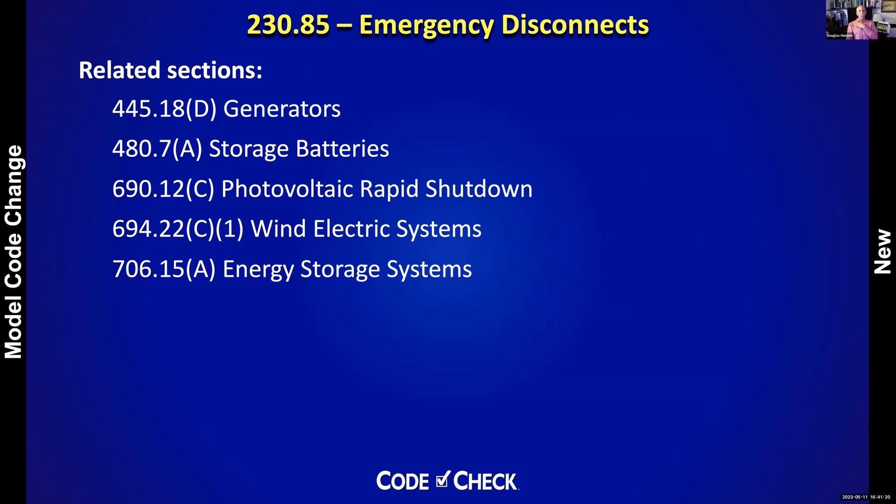Now we get to the third most important big change in the code, which is that every electrical service now requires surge protection. And this applies whenever you replace a piece of service equipment too. It's not just new houses, it's applicable when it's replaced. So what is this surge protective device all about?

The idea of the surge protector is basically to help protect the electronic equipment that is both in your circuit breakers and in your house that you're using, your computers, your TV sets, everything has got electronics in it these days.

And there are several changes to the code on this. It used to be that we had this distinction. We used to have a separate article in Article 280 about it. Now there's one in Article, I think new Article 242 or something. Over voltage protection is what they call it.

There's 2 types. There's surge arresters, that are for high voltages, and there's surge protection that are for low voltages. That's to say 1,000 volts or less.

Now, why does this matter in a house? Going back to what we talked about this morning, about that indirect lightning strike, the one that wasn't your house that blew up your CSST, it was the one on the house across the street from you that still blew up your CSST.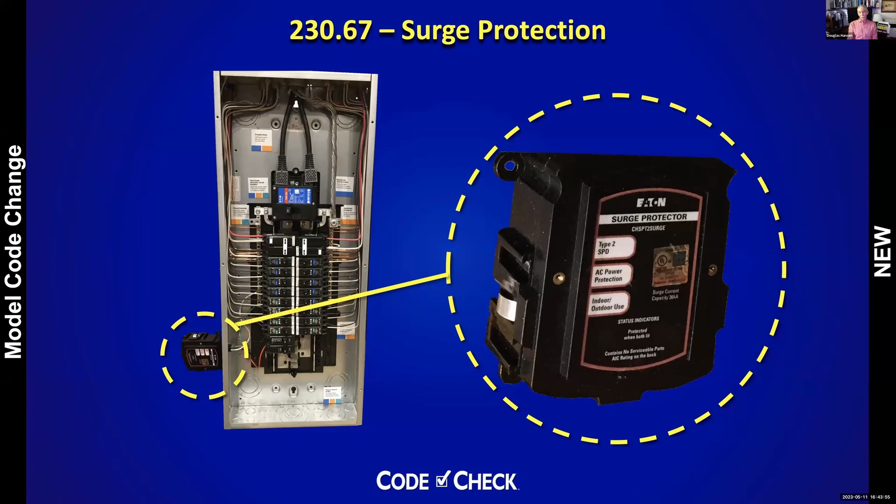So every house now gets surge protection, and they give us these different categories. Type 1 or 2 is what you're required to have. Type 3 on the load side of a branch circuit breaker, that's different, trying to think of an example. Outlet strip would be one. My computer is plugged into a type 3 surge protector. And type 4 is something that's actually built into a piece of utilization equipment.

So this is, I think, another huge change coming up, that we're going to require this, and that it's required on every service upgrade as well.

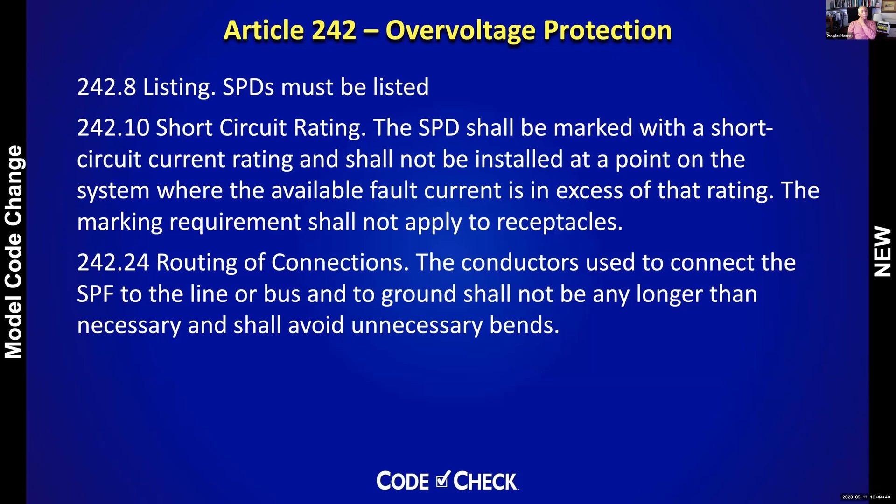Okay. No, you guys don't care about that one.

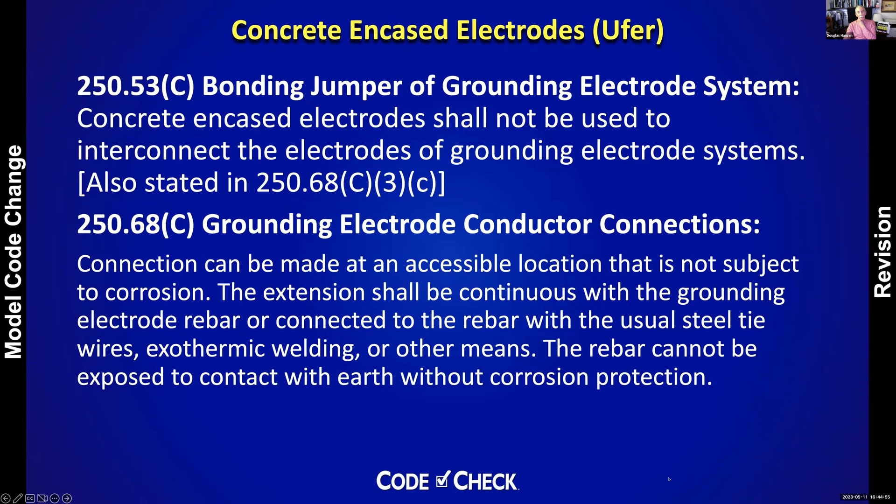Do you guys use concrete encased electrodes out there in Virginia? Yes, lots of times. Yeah. Oh, good. Okay. Well, I guess we should talk about that one then. Good. Do I have- oh, good. I have a good picture of it here. Okay.

So one of the problems- well, first off, let me go back a little bit to where this all comes from. These are commonly referred to as Ufer grounds. And when I first heard that term, I thought, oh, that must stand for underground ferrous rod. No?

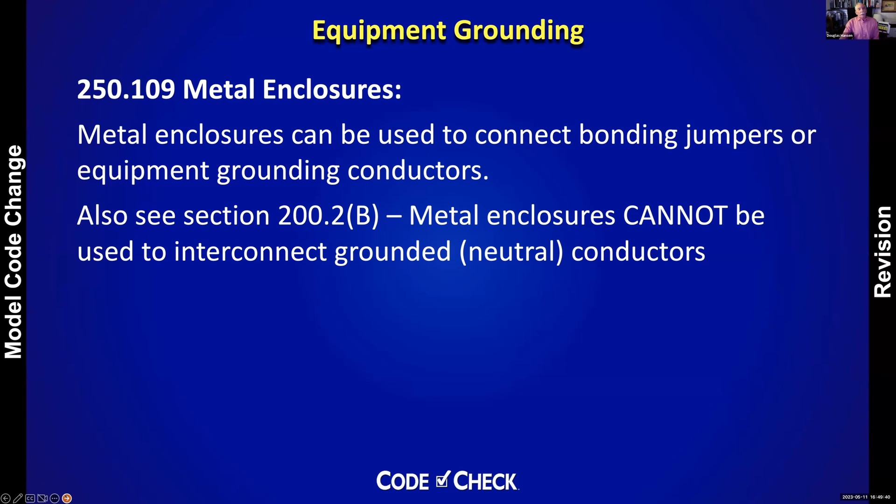This is an interesting clarification, something I always thought was true to begin with. Suppose I've got this sub panel with my separate neutral bar here and my separate equipment ground secured to the panel. Suppose I want to add another equipment ground bar here - do I have to run a wire between these two equipment ground bars to make them continuous? Well, they answered it for us this time: no, you don't have to. It's only the equipment ground, so it is okay for the enclosure to electrically connect it.

Now suppose this was the service panel, and this had a main breaker and all this - you got to bear with me here and visualize this. Suppose it had a main breaker and that was a neutral bar over there. The answer would be no - you can't let the enclosure be part of the path for the neutral, but you can for the equipment ground.

Now there's one more little thing I want to add. Probably you guys don't go through more than 2 or 3 days before seeing a sub panel where somebody has the grounds and neutrals connected together. A lot of times it's because when they purchased that sub panel, it didn't come with an equipment ground bar - it's something you have to actually buy and spend another $5 on in order to get it in there.

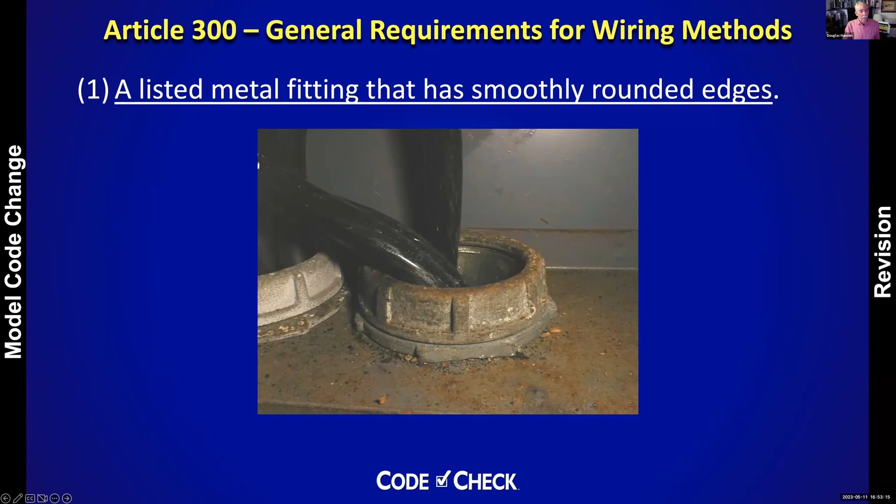It used to say in the old days that it had to be a smoothly rounded bushing, then it said it had to be a smoothly rounded insulating bushing. Now they took the word insulating back out, so we can do it with something like this old picture.

But where this is most commonly done wrong is with PVC. People seem to think that a PVC fitting, because it's insulating, doesn't need a bushing, but it does. It's because those sharp edges on those PVC fittings can cut the insulation on a conductor.

And conductors don't stay in place where you put them inside a panel, especially if it's aluminum - they're going to have longitudinal expansion and contraction. If it's copper, they might have movement from magnetic fields when you turn something on and off. In a big commercial building, sometimes when they shut off a motor, you actually hear the conductors bounce inside the conduit. But anyway, it requires it for PVC.

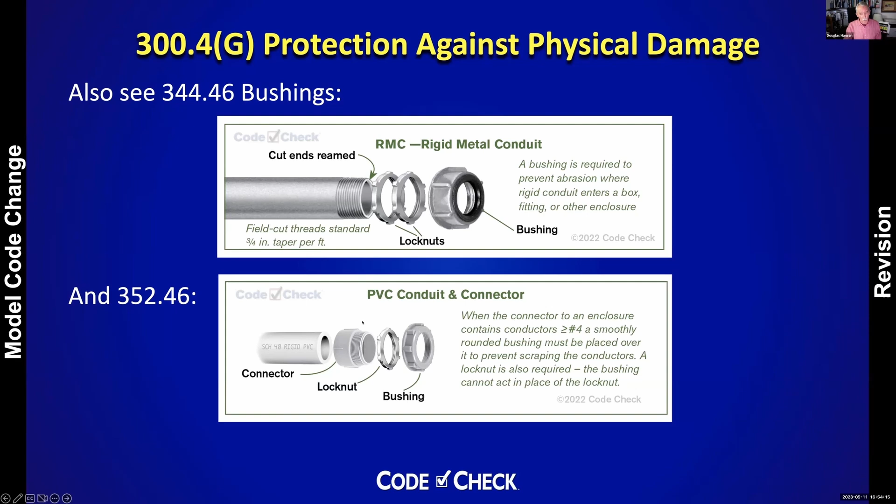So what's going to happen is it's going to condense moisture inside that walk-in cooler and rust out my light fixture. Anybody that's ever worked in a restaurant has seen this. So what they have to do is seal that conduit where it goes between those two temperature zones.

The reason I'm bringing this up is because it also applies when a conduit goes from the inside of a building to the outside. You might have that happening with, say, somebody powering up an air conditioner by running a piece of conduit through the wall from interior to exterior. It should have a seal-off fitting at that transition.

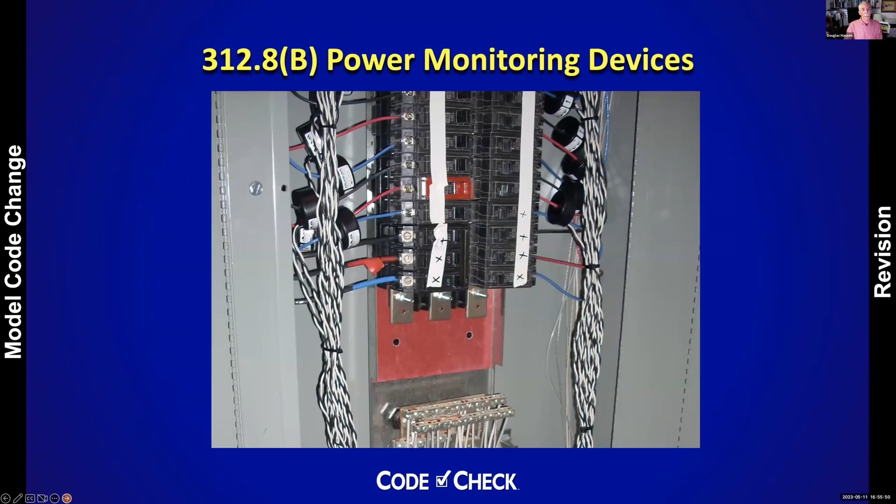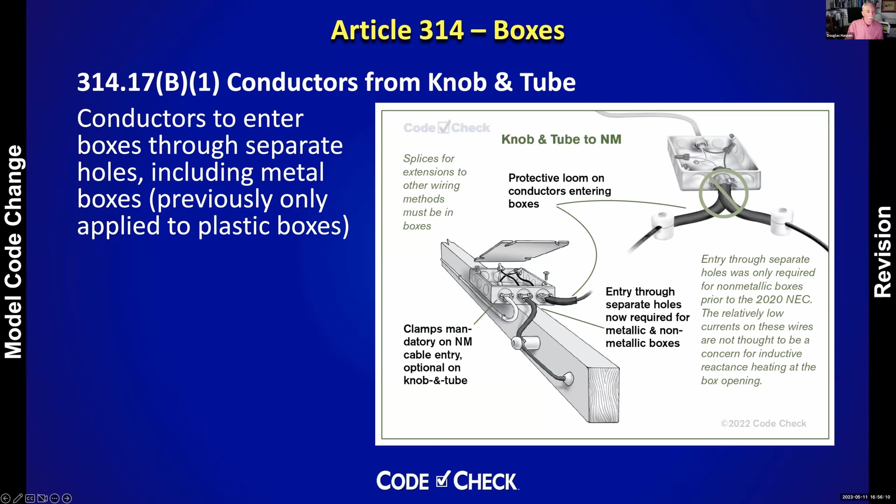I don't like this. We're going to skip this.

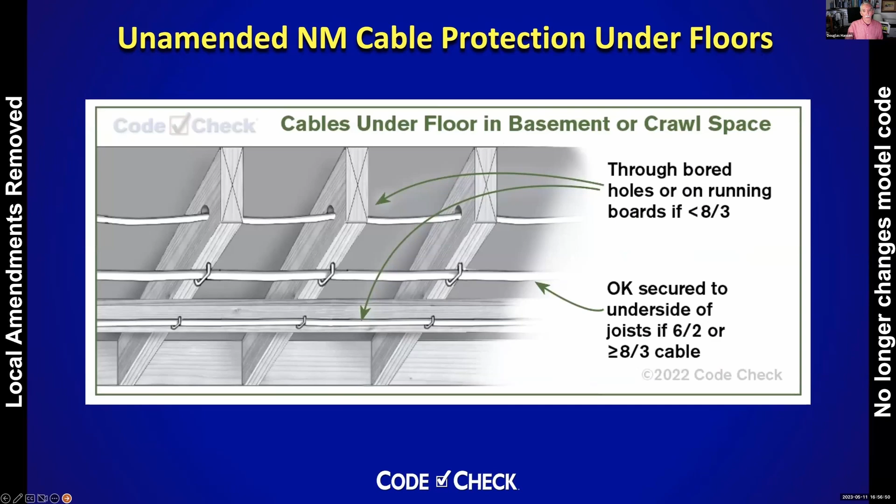I think this isn't really a change, and I think Virginia concurs exactly with those two, from what I read in your code.

This is an interesting one - that intermediate metal conduit finally gets its day. Rigid conduit and intermediate conduit aren't made out of the same kind of steel.

Intermediate conduit is tougher. It's a better steel than what they use in rigid, so it's just not as thick. A lot of people seem to think that rigid is necessary for support of a service mast or in other applications where it's installed for protection of the conductors. What this is saying is that you could also use intermediate for that purpose.

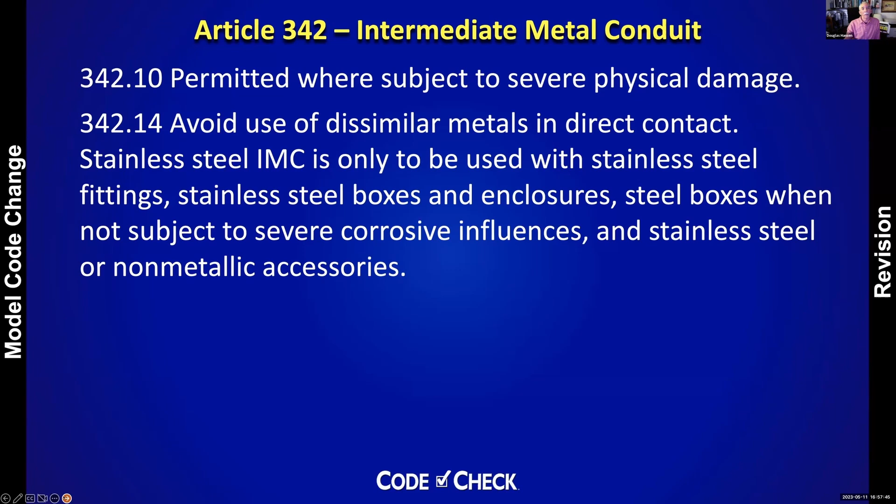I expect there'll be some more cleanup on this language too, because now Ryan Jackson's on that code making committee. He represents the Steel Tube Institute now to the codes.

Last one, I'm really glad we got to talk about this one. Aluminum wire is coming back.

In the old days, the problems with aluminum wire when it was first introduced in the 1960s, the Kaiser K-Flex and other things, was that it was really not a wiring grade of aluminum. It was a utility grade of aluminum that they would use in steel reinforced aluminum overhead conductors. So it had no business being in NM cable. We all know the old stories of how there's different kinds of splicing devices you use for it and this, that, and the other.

But for a brief time in the 1970s, there was this stuff called copper clad aluminum. It was copper on the outside with aluminum on the inside. And it has come back now.

It's going to be widely available, and it's going to be very easy to miss this as a home inspector, because the same color of cable is going to match for the equivalent ampacity of copper. In other words, a 12 gauge aluminum wire is only rated for 15 amps, but the new copper clad aluminum 12 gauge is going to be in a cable with a white jacket.

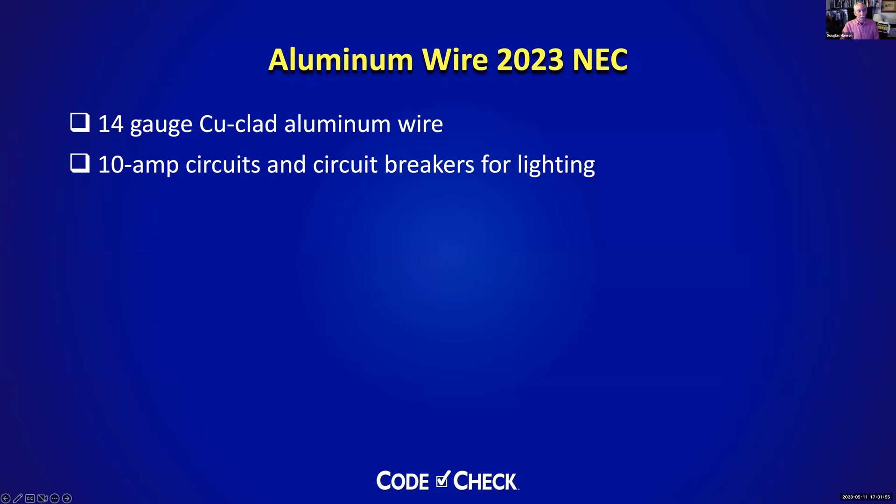Just one last thing here on aluminum, and that is we're also going to see 14 gauge copper clad aluminum wire. This is in the 2023 code. And we're going to see 10 amp circuit breakers for lighting, because the lighting loads in a house now with LEDs are so low that they can do this. Now, the one person who's really upset about this is Mike Twitty. He foresees this becoming, there's just too many ways for things to go wrong. And Mike would know, he gets to see them. But I just want you guys to know that it's on the table as well. It'll be a little while before you run into this one in houses.

So I think that we've run out of time. I was going to entertain you with some other little stuff here, but I think, Hollis, should we be wrapping it up here? Yeah, I have a concert to go to. Okay.

Question in the chat: where can I get the updated code book for the Virginia code? If you get the handout for this, I have the link for it inside one of the slides on that handout, right near the beginning. But basically just do a Google search for Virginia residential code, and you'll find it. Skip also answered that in here as iccsafe.org.